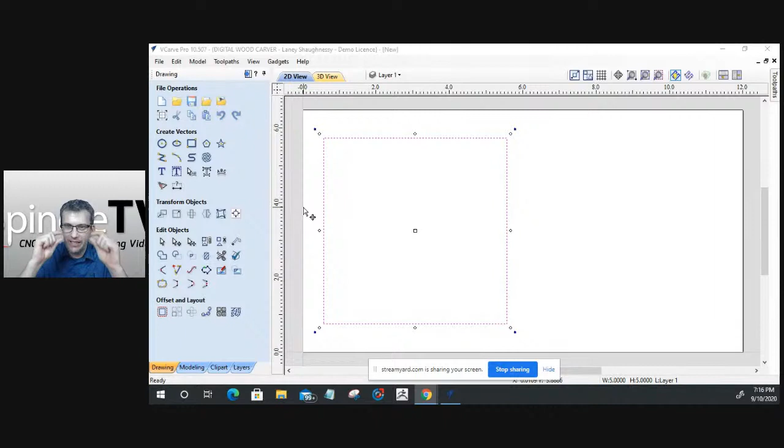What I'm going to do is make just a fun little thin, kind of almost like a pocket tic-tac-toe game for kids, right? We're going to start off with a very simple one, it's got a little lid that holds all the pieces and everything. Very simple little tic-tac-toe project, just kind of messing around. We're going to do some designing while I'm answering your questions, and we'll go from there.

Right now I've got a project set up that's basically a 12-inch by... let's go 7.5, so we'll make it a 1x8 board, 1 by 7.25. Just a simple 1x8 project board there, this is what we'll use. I'm going to be touching off on the surface material, starting in the bottom left corner. So 12 by 7.25 by 3/8 inches thick, it's going to be 3/8 inches thick. And then I'm going to be cutting some of the parts out of a 1/4-inch thick piece of material, probably most likely 1/4-inch plywood or something. But that'll be my job setup.

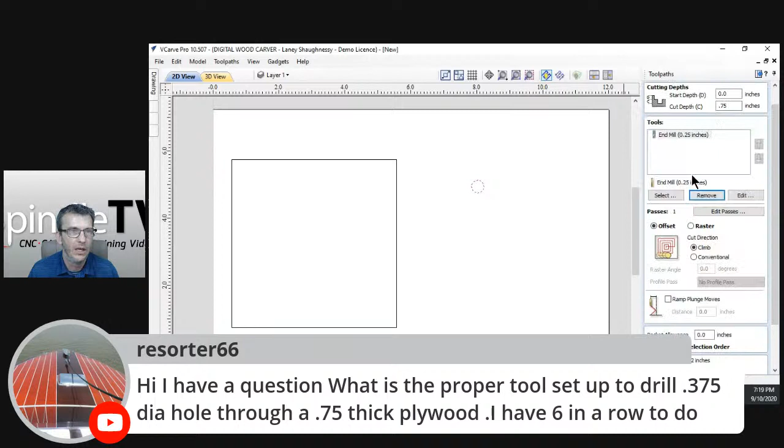Because if I'm using, let's talk for a minute, like a 1/4 inch hole, right? Let's say if this was holed with a 1/4 inch bit. If I'm drilling a 1/4 inch hole with a 1/4 inch drill bit, and I come down too fast on it, there's an opportunity for that bit to flex a little and slightly wallow out the top of the hole. So if I use an undersized bit, like a 1/8 inch end mill to cut my 1/4 inch hole, then it won't wallow out, I'll get a nice, perfect, clean 1/4 inch hole. In our case, we're cutting a 3/8 inch hole with a 1/4 inch bit, and we're going to run it as a pocket toolpath offset. Let's hit edit here.

So a 1/4 inch diameter bit, draw your 3/8 inch holes, and do a pocket cut. That would be the best way to do it. Give you some nice clean holes.

If you need the holes oversized or undersized slightly for whatever reason, then you can put in a pocket allowance. A negative number is going to be a bigger hole. A positive pocket allowance is going to be a smaller hole.

So if you need to slightly sneak in on that fit for your dowel and all, you can go negative 0.002, like 2/1000ths of an inch, and just slightly over big so that it fits in just perfect. If you wanted to, first do it with no allowance and see what your fit is. If you need to make it a little bigger, add a little bit of an allowance to it. All right, cool. Very cool.

All right, so let's back up on Darwin's question about saving and all. Troy throws out that there's also an increment and save option, and that's an option that people don't use very much. Let's go to a full screen here.

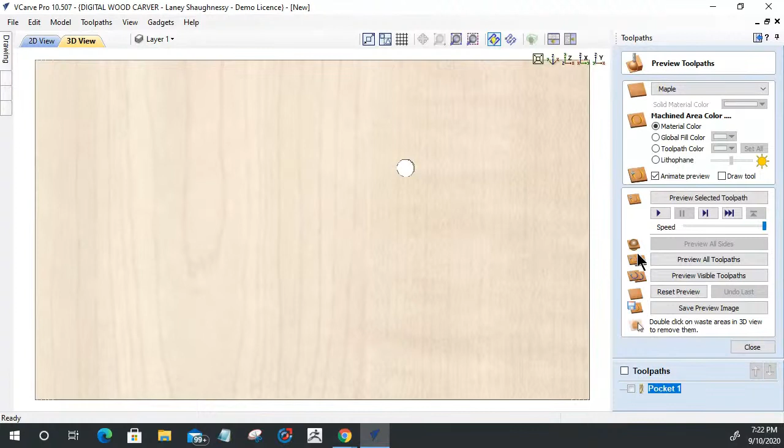And it's something that people don't use very much. But if you have to create revisions that you might need to backtrack on, increment and save is a good option for that. So thanks, Troy, for throwing that out there. Not many people use that much, or really know about it, but that's good that you brought it up.

All right, let's get rid of that pocket, and let's move back over here to my 2D view. Let's get rid of this circle, and we'll move on to the next question. Let's get this centered up. Now, what I'm starting off with here on my 1x8, 12-inch long board, 3/8 inch thick, is a 5-inch by 5-inch square.

5-inch by 5-inch square. And we're going to have both the lid and the gameplay area on the same board - we'll cut them both out of the same board. So what I want to do is mirror this right here.

I'm going to create a mirror copy and flip it about job center, and I'm going to flip it horizontally, so I have 2 of them there. Cool. All right, let's go on to the next question.

How do you keep track of all the Vectric files? Do you group by tool, laser, 4th axis, etc., or some other way? Harvey, that's a great question - how do I save my files and everything?

When I'm training my customers, usually the first thing I have them do is in their documents folder - and this computer probably isn't set up properly, but we're going to see how well I follow my own instructions - in the documents folder, I usually have them create a folder called CNC jobs.

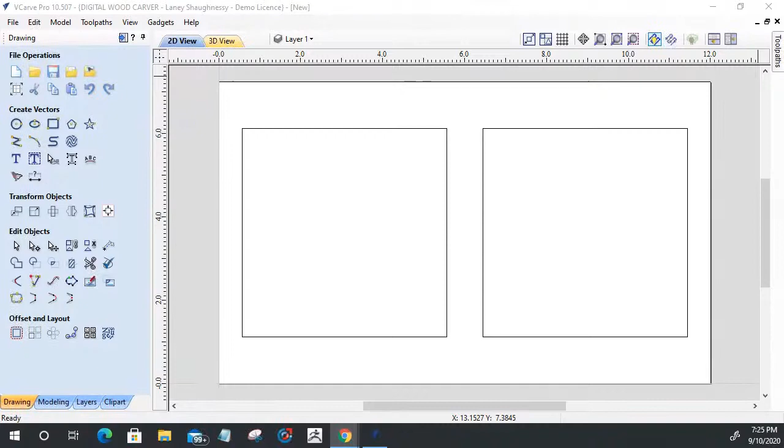So that's how I do it. You can set up whatever system works for you. And if you want a holiday type theme, like Christmas, Thanksgiving, Valentine's Day type projects, you can break those categories down and put those projects inside there, really kind of have those sub levels. That would be good, right? There'd be nothing wrong with that. So that's a good question.

All right, so in here I want to create the gameplay area. What I'd like to do is an offset of this, my outer perimeter here. I want to offset inward about a quarter of an inch, so we'll go 0.25, and I don't want sharp corners on this necessarily. And that's going to create kind of my gameplay area. Well, part of my gameplay area.

Now I'm going to offset another quarter of an inch. Okay, and this is my gameplay area here. This area here that's going to get, that's going to be some wood, a wall of my wood. And this is going to be milled down here so my lid can fit on it.

All right, so as we move along, hey, Crisscross Grass got here on a Thursday early. Hey buddy, what's happening? All right.

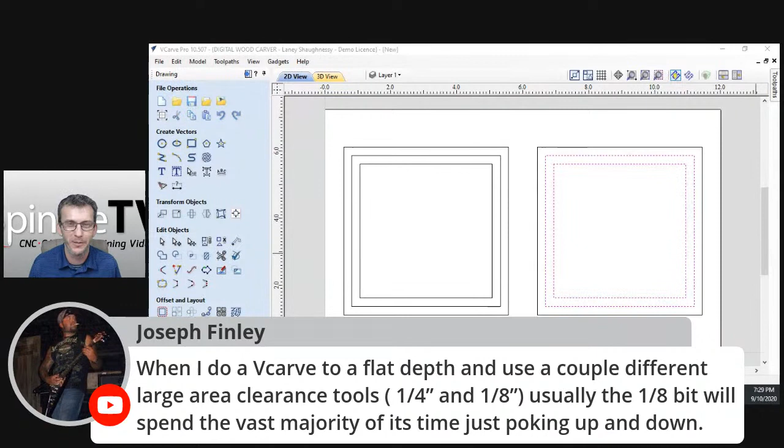So what you've got to look at is, if you're going to use multiple tools, if the 1/8 inch bit really isn't doing anything, then eliminate it and let the V bit just kind of clean those areas up. Do the 1/4 inch do the majority, and then let the 1/8 inch bit clean up in there. But if there are some majority areas where that 1/8 inch bit can fit and it is actually doing something instead of just poking around and cleaning up little bits and pieces, then great, use it. But yeah, that's what's happening. I don't know if that helped answer your question, Joseph, but that's kind of the gist of what's going on.

To follow up on your question - is there a way to fix that? Eliminate it or reduce down to a 1/16 inch end mill, right? Because that 1/8 inch end mill is just too big to get into those smaller areas, so the V-bit's taken over. You could eliminate that and get a 1/16 inch end mill - Toolstoday.com sells them, among other places. That smaller bit would do a lot more work, and the V-bit would have to do less. But if that 1/8 inch really isn't doing anything, eliminate it and go with a smaller diameter bit. That's kind of where we're at there.

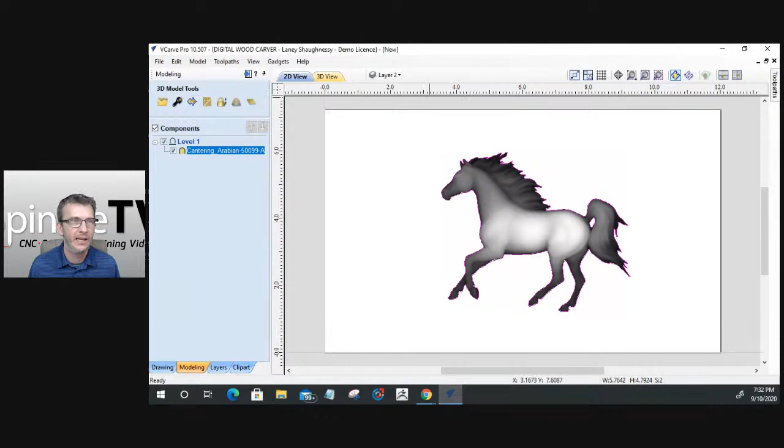Just click that, select your component that you want to put a boundary around, and click that button there, and you're set. Now if you're in Aspire, that button is further down, I think like the second row of tools, but it's still the same looking icon. Let me go with a bigger screen so you can see what that icon looks like a little better - just a little spinning top on its side with a blue perimeter line on it. Right there. Awesome.

Okay, awesome, so let's get rid of that, let's go back to our - delete that out of there. Let's go back to layer 1 where my design is. And now on my design here, what I want to do is divide this up into a tic-tac-toe kind of playing field, right?

Let me basically get these toolpaths created so you can see what's happening here. So the first thing is, on this toolpath here, I'm going to take my boundary over here and do another offset slightly outward by just 1/16 of an inch - not much, a slight 1/16 of an inch. The sole purpose of that boundary is so I can select it with this one here. Let's close this for a minute. The whole purpose of this outer boundary is to select it with this inside one so I can do a pocket cut. My material is 3/8 of an inch thick.

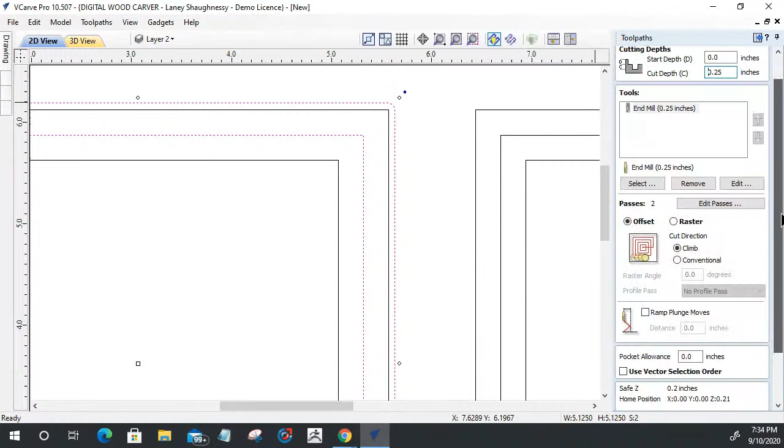Now you guys are going to see some keyboard shortcuts, so pay attention - I'm going to use the letter T, T for thickness. The software knows how thick my material is, it knows it's 3/8, and I'd like to leave 1/8 of an inch of material - I want it to mill down and just leave 1/8 inch. So T minus 0.125 equals 1/4 inch - 3/8 minus 1/8 is 1/4. I'm going to use a 1/4 inch end mill here, offset cut it, and add a ramp - just a 1/2 inch ramp, not too many decimal points. This is going to be my outer pocket, and this is going to be my base part.

Outer pocket. I'm going to go ahead and throw in the bit that I'm using, a 0.25 end mill, and let's calculate that out. Cool, so now we have that pocket there.

For kicks and giggles, I'm going to take this vector and do a profile cut. That's what's going to get cut out, all the way through my material, 3/8 of an inch, with that 1/4 inch end mill on the outside of the line. I'm not going to put tabs on this - no tabs for preview purposes only, but I will put tabs on it before the final save.

I will do a ramp on this. I'm going to do a nice zigzag ramp, just a 1/2 inch ramp is fine. This is going to be my base profile cut, 0.25 end mill. Let's cut that part out just so we can take a look at that base.

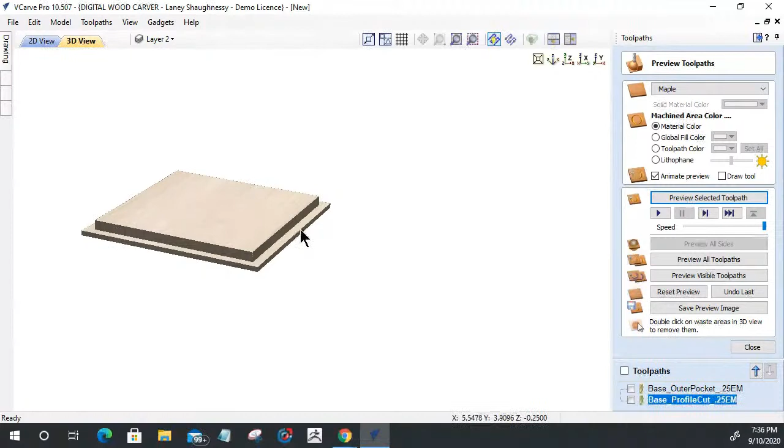So essentially what I have here is this is going to be the base of the gameplay area. This will be the bottom. We've got a little trim rim around it. Okay, cool, so that's where we're at on that too.

Now let's see here, let's keep going. Yeah Chris, I can't believe you made it before 9 as well. Cool, I'm so glad you made it, man. Let's see here, good evening. You guys just keep typing your questions because what I'm going to do is design a little bit, answer some questions, design a little bit, answer some questions, and hopefully I'm answering those questions for you guys to help you out.

Now these two vectors basically are going to represent the meat in the middle, which is going to represent my wall - there's going to be a wall there. And my gameplay area, this inside area here, I've still got to put my dividers in there, they're not done yet, but this is going to get pocketed out.

I think I'm going to use 1/4 inch material for the X's and the O's, right? Of course we know that plywood's nominal dimension is 1/4 inch, but its actual measurement is 7/32, right? Okay, so before you guys jump all over me, let me make sure I got that correct. All right, hold on a second.

Plywood dimensions... yeah, 7/32, I was good, I thought I knew my stuff. Just as a reference for you guys and girls, if you ever wanted to know what the plywood dimensions are, just type in plywood dimensions in Google, and there's a cool little sheet that says actual thickness of plywood. It's a little photo, it'll show you your nominal dimensions versus your actual, which is pretty cool to know. So for 1/4 inch it's 7/32, right?

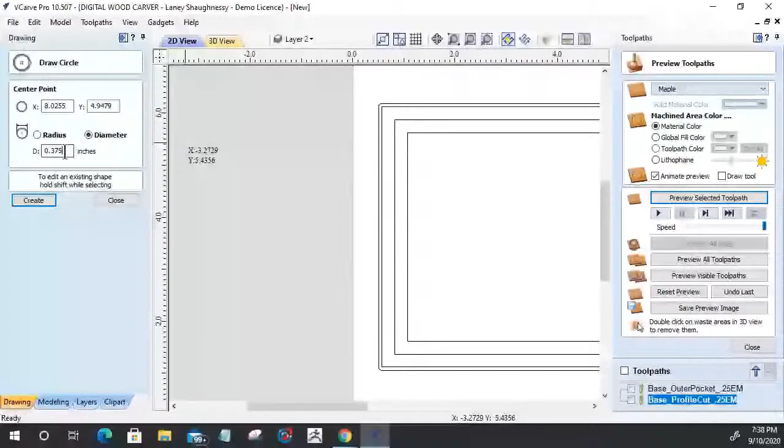All right, so now let's get some X's and O's here. I'm going to use a circle tool here, and I really need to know how big my parts need to be. So let's start off first with a 1 inch diameter. Let's see how big that circle is.

Let's see, just for kicks and giggles, if I array copy that and I do 3 and 3 - 3 rows of 3, 3 columns - and I do a gap in between each one about the thickness of what my wall is going to be. I'd love to have, I don't know how much material I have, but I'd love to have a 1/4 inch thick wall, right, and on the Y a 1/4 inch thick. And if I copy that - oh yeah.

So, you know, let's center these up inside of - I'm going to group them together, the letter G on the keyboard for group, to group those together. I'm going to select this rectangle last, and in my alignment tool, I'm going to align to another selection, which is that last rectangle, and center that up. Yeah, that's pretty darn good right there, because I'll have my wood and everything. I probably could make them a little bit bigger, but this will help me show me where my pieces are going to go. Okay, cool.

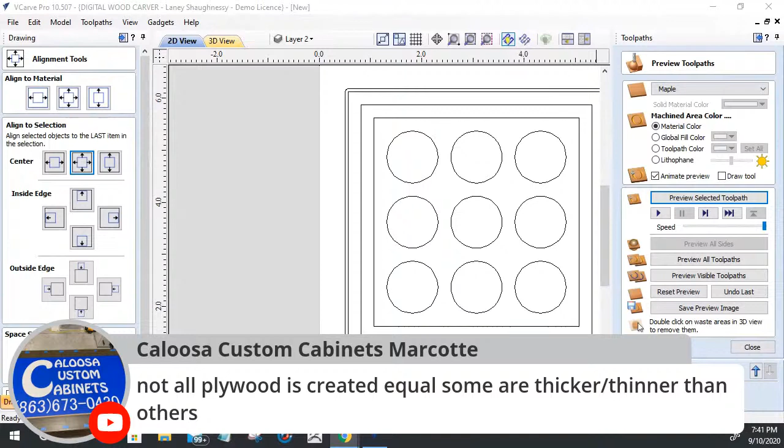I'm going to be picking up my pieces. I'm going to be a cheapskate and cut my game pieces out of simple birch plywood from Lowe's. So we'll trust the 7/32, but of course we would measure our plywood, right? We would put some calipers on it just so we know, because we've got to cut the parts out.

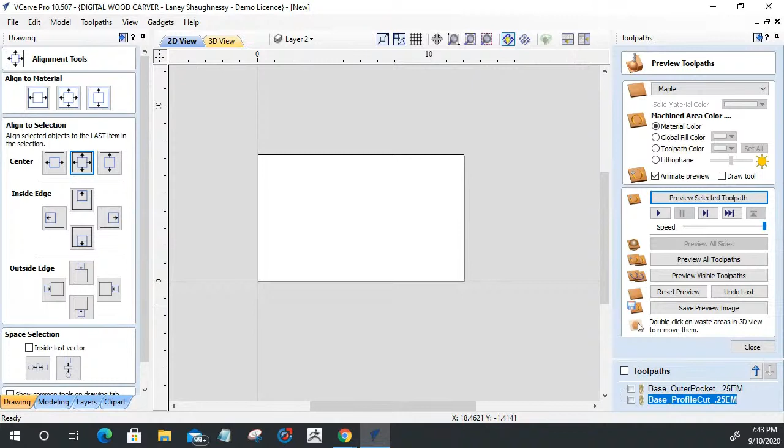Absolutely, I sure can. Let's turn off our layer 1 and throw these guys on - all these are supposed to be on layer 1. I'm going to right click and move to layer 1. The reason they got put on layer 2 is because layer 2 was active - even though it was turned off visually, it was still active when I was drawing it. When I'm drawing this design, I need to make sure layer 1 is on and active, bold right here. But right now we're going to turn it off and make layer 2 active.

All right guys, let me explain this the way I explain it to my customers when I'm teaching them about setting their Z height - using material surface as their Z0 position versus their machine bed. For me, I'm sure there's hundreds of reasons why one would choose the other, but there are two main reasons that I specify.

Let's draw out our table - let's say this is our tabletop. Cool. Let's say on our tabletop we have a wasteboard, a sacrificial wasteboard. Then let's throw a project board on here. Let's draw a router bit and a router. Let's select all of these and line them up center to center so they look more like a router, and group them together so I can manipulate them as one.

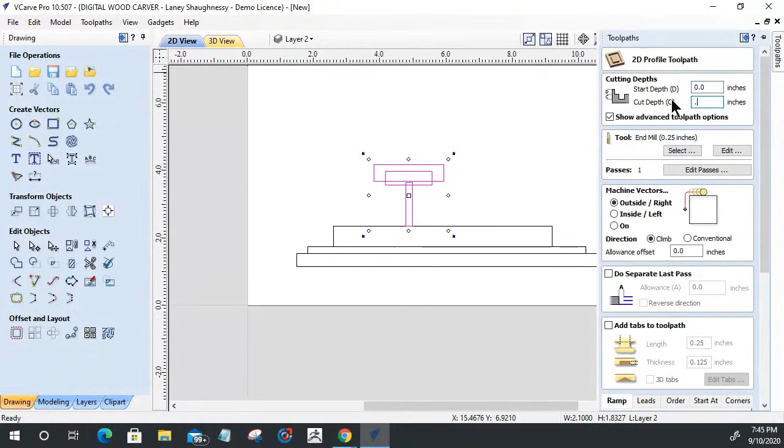All right, so if I am zeroing out on the material surface with my bit, that becomes 0, okay? And when I'm doing something like a profile cut, pocket cut, any toolpath really - let's talk about a profile cut right now. Let's say I do that profile cut and I'm cutting through my material, 3/4 of an inch, 0.75, right? Well, the software is cutting from 0 down to 0.75, okay?

Right, okay. Now what happens if my material is just a little bit thicker than 3/4, or a little bit thinner than 3/4, and I don't know that? I didn't put calipers on it - I just threw it up on the table because I bought a 1x4 from Lowe's and I assume it's 3/4 of an inch. An assumption is the mother of all - you know the rest.

But let's say my board was a little thicker than 3/4, let's say it's 0.8 instead of 0.75. Well, I just told my software to cut to 0.75, so it's going to cut from 0 down to 0.75. And I'm going to end up with a little onion skin where it doesn't cut through, and I'm going to be like, damn, it didn't cut all the way through. So now I got to go in here and try 0.77, do it again, or go 0.80 and do it again.

Well, now I'm guessing, right? I'm guessing how that is. And so now what I'm going to end up doing is overcutting, and I'm going to end up spoiling my spoil board. I'm going to be cutting into my spoil board, putting all kinds of nice grooves in it. And it's the same if my board was thinner than 3/4 of an inch. If I tell it to cut 3/4, I'm cutting through my board and into my waste board. So I'm spoiling my spoil board when I'm cutting into it.

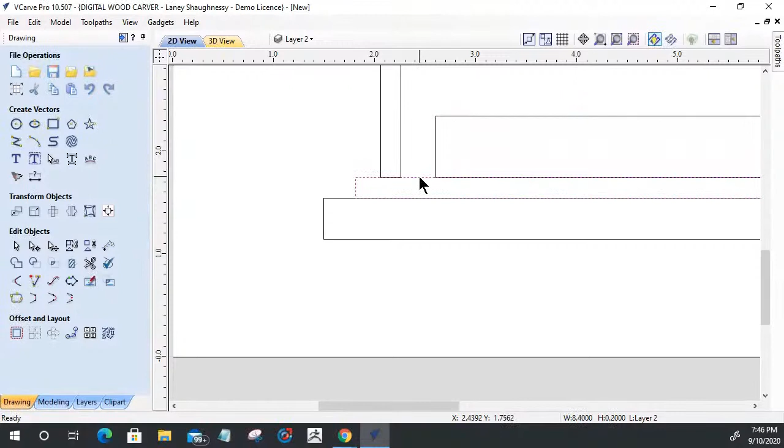So if we decide to set the machine bed, which is whatever your project board is sitting on, in my case it's a waste board, as the Z0, well nothing changes for me in the software. I'm still telling the profile cut to cut from 0 to 0.75. That doesn't change. But in the software, it does all the stuff in reverse. It says, okay, this dude has the machine bed set at 0, so he's telling me to cut 3/4. Well, I'm going to go up here and cut from 3/4 down to 0. So it does it in reverse, cutting from 3/4 to 0.

Now this guarantees 2 things for me. Number 1, if I'm working off the machine bed at 0, it's going to guarantee I'll always cut through my material, because it's going to cut from 3/4 down to 0. Whether my board is a little thicker or thinner, it's still going to cut all the way through because it's cutting down to my waste board. So that's number 1. Number 2, it's going to guarantee that I don't spoil my spoil board. Now I'll get tool marks, right? The bit's going to be kissing across that surface, I'll get tool marks and stuff, but I'm not gouging into it, because it'll always cut down to 0 and never below 0.

Okay, alright, so it guarantees 2 things for me. I'm cutting down to 0, right? Now the other reason, that's reason number 1 for me to work off the machine bed versus the top of the material. If I'm doing a VCarve where I'm not cutting anything out, I'll reference off the top of the material, no big deal. If I'm using my digital wood carver zeroing block, which rests on top of the wood and automatically sets X, Y, and Z when it touches off, it's referencing off the top of the material. But if I'm cutting through my material, then I zero out on my machine bed, because I don't want to spoil my spoil board, and I want to guarantee I cut all the way through my material without leaving a little onion skin. So that's reason number 1 for me.

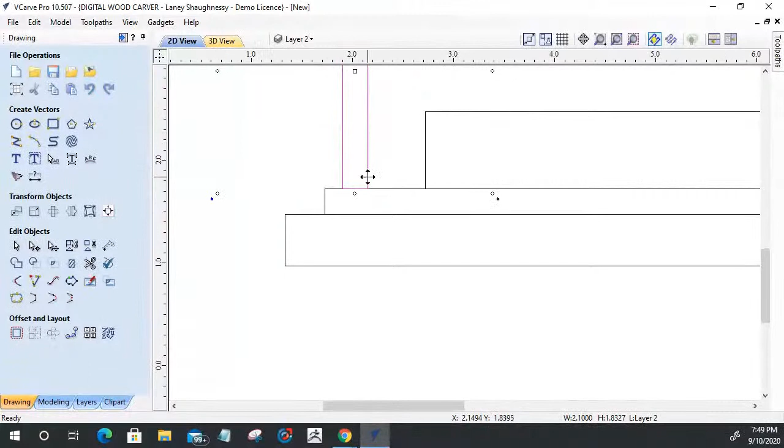Number 2 reason why you would set the machine bed as your 0 position versus the top is if you were doing a 3D model cut where the entire surface of your material gets milled away during the rough cut, or even during the finish cut where that entire surface is getting milled away. Well, now I have no more surface to touch off on for my ball nose bit, my finish cutting bit, and things like that, because it's all been milled away. Unless I make my board a little bit bigger, where my clamps are going to go, and I can touch off on that. But if I've got my board double-side taped to my waste board because I'm going to mill this whole surface—there's going to be a cool eagle on it or something—that whole surface is getting milled away.

Now I have nothing to touch off on for my second toolpath, my third toolpath, whatever. So I would reference my Z0 position off the machine bed. I have a known, flat surface to snap to and work off of. That's the number 2 reason why I would work off the machine bed versus the top. If there's a way that top surface is getting completely milled away, leaving you with nothing to reference other bits off of, then you work off the machine bed as your Z0.

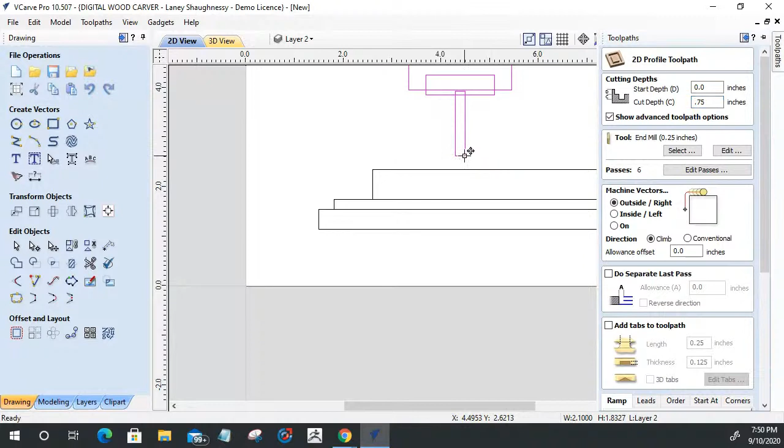If I'm doing a pocket cut, let's pretend that's a profile there, but it says pocket. I'm doing a pocket cut from 0 to 3/8. Then it's cutting from the thickness of my material, 3/4, down to 3/8. It's cutting 3/8 of an inch deep. So it does all the math and everything backwards for you. You don't have to think that hard about it.

Hopefully, Jeff, that was a long explanation, and hopefully that helped clarify some things. But the 2 main reasons I use the machine bed versus the material surface are: number 1, if I'm cutting through my material, because I want to guarantee I cut all the way through without spoiling my wasteboard, since my wasteboard is a jig. And number 2, if my 3D model cut is going to be milling that entire surface away. It doesn't have to be a 3D model either - any of my cuts, if I'm doing a pocket cut or whatever and my whole surface is getting milled away, then I have nothing to reference off of for the VCarve cut, for this, for that. So I want a known flat surface, so I use the machine bed, which would be your wasteboard in this case.

Hopefully that answered that question for you, Chris. Or not Chris, Jeff - that was Jeff's question. I don't know why I got Chris on the brain tonight.

All right, let's go back to our design and make sure layer 1 is active that we're drawing in, and let's continue on, and then we'll answer some more questions.

Well, wait, hold on, let's see here. Let me see, there's a conversation going on here. Let me make sure none of these are questions. All right, they're talking plywood. Let's see here. Ronnie, let's see here. Make sure I didn't miss any questions up there past Jeff's question.

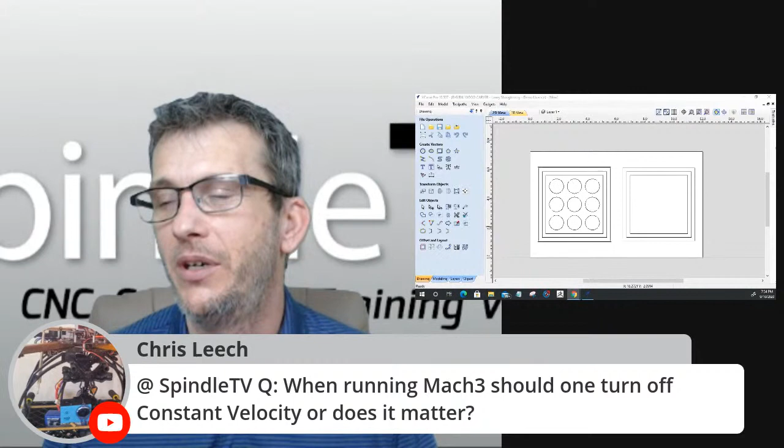But if anybody knows the answer to Chris's question - when running Mach 3, should one turn off constant velocity or does it matter - please put it in the chats to help answer his question if you know it. Okay, cool. All right.

And Chris says he just ordered a corded controller for the joystick thing. Yeah, I'm looking forward to this. I have one - this is the one that runs my machine, and it's fun. I have my X and Y linear movements side to side here, my diagonal movements are the other joystick. My Z up and down and my jog speeds are the left, right, up and down buttons here. And then I can start, stop, pause, emergency stop a program.

On the front buttons here, I can zero out my X, Y, Z axis, and bring my machine back to home. All the buttons have their own functions to run the machine, and I'm going to be showing people how to set that up in a video this weekend. But yeah, it's pretty cool, I just like it, it's fun, it's something different. The joystick thing, that's what I like. It's sensitive though, man, those joysticks are sensitive.

All right, let's answer Chris's question. Let me get my wallet out of my pocket here so I can sit comfortably and gear up. Let me see here.

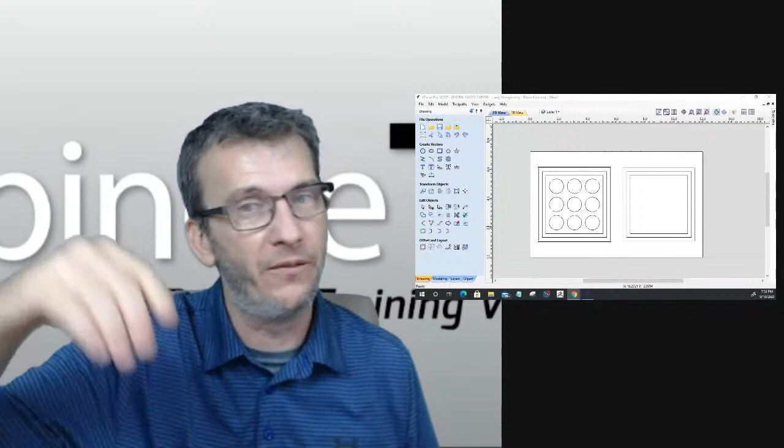When performing a finished toolpath, is there a way to force Vectric to start on top and work down to a final depth versus what Vectric usually does? A lot of people may not know that on a 3D finish toolpath, it goes to the full depth and rides that depth, only raising up or down based on the contours of the model. The rough cut toolpath does multiple passes, but the finish cut goes straight down because it's assuming there's only a few thousandths of an inch of material left, so it rides at full depth, only raising up and down based on the model's contours.

Chris asks, is there a way to force Vectric to start at the top and work its way down on a finish toolpath? In my six years, I've never found a way - no. I'm going to definitively say no. I'm sure there may be some workarounds I'm not aware of, but as far as programming or setting something, no. It's designed to ride at the end, so I don't know of any way to change that. Sorry, I wanted a good answer, but that's the only one there is. There's a lot of people out here running Vectric, and if you know a way I've never found - I'm pretty in depth in this stuff - share it, I'm always up for learning too. But we're talking about a 3D finish pass that's designed to ride at the bottom of the cut, only moving up and down based on the model itself. The question is whether there's a way to force it to start at the top and work its way down, and unfortunately, no.

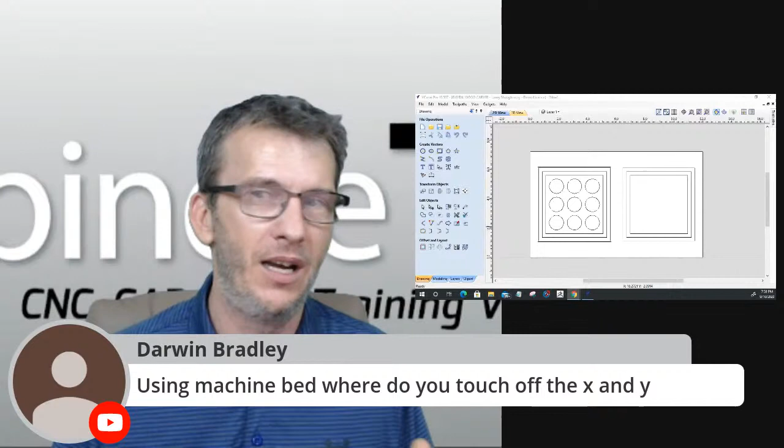Darwin pops back in and asks, when you're using the machine bed, where do you touch off the X and Y? We always set the X and Y first. So let's say I'm working in the center of my board, and I'm using the center of my material for my datum position. I'm going to raise up and zero out X and Y first, get my bit over that center point, come into my software and controller software and zero X and Y.

Then I'm going to move my router over to my wasteboard, come down and touch off my Z. Now some people have touch plates, some people have touch buttons that are automatically set up. I'm talking about when you're manually setting your Z on the wasteboard with your touch plate or touch sensor. Zero out the X and Y first, then come over and touch off the Z. Now, for users using the digital wood carver quickset block, which sits on top of the wood here.

It is designed to touch off X, touch off Y, then raise up and touch off the Z automatically, and it sets the Z. After that touch off is done, you bring your touch block, set it up on top of the wasteboard, our machine bed. Move the router over and bring it down, touch off on it, and type in 0.5 to reset your Z. Hit enter to lock it in, and that'll reset the wasteboard as your Z0.

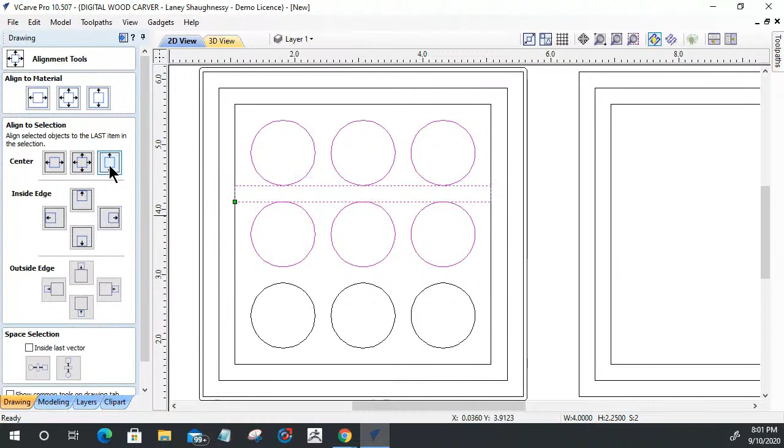I need a 1/4 inch, 0.25. I'm going to ungroup these. I'm going to select just these 2 rows right now, and group them together so the software treats it like one object. I'm going to select this rectangle first and then this group last because I want to center up and down to this group. I'll use my alignment tool and align to center, so that'll center it there.

All right, I'm going to select this group again, ungroup it. The letter U on the keyboard is your ungroup shortcut. I'm going to group this with the letter G to group this together.

I'm going to select on this, and come in and hold down my control and alternate key to move this down. The alternate key keeps my part centered. No matter where I move my mouse, whether horizontally or vertically, I can move on those alignments, but I can't move freely off axis, like down in that corner where the arrow is. That alternate key is keeping it restricted to those 2 axes, so I just want to move straight down with control and alternate.

That makes it copy. It looks like I snapped right to where I need to be, but I don't think I did. So I'm going to select my group last, and align up and down. It was so close, it didn't move. There we go.

Now I'm going to use my keyboard shortcuts. I want to make a copy, so up here, copy and paste—no, that's undo and redo. Sorry, copy and paste is Control C and Control V. So I'm going to go Control C, Control V to make a copy.

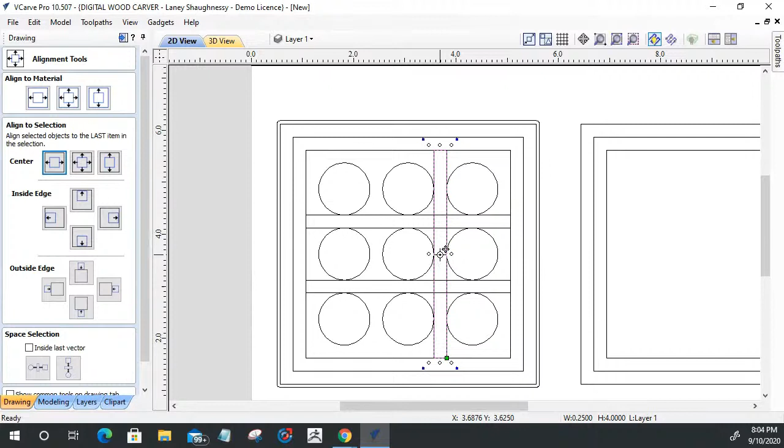All right, Control C, Control V, copy paste. I'm going to hold down my alternate key and drag that across. Snap it right there.

It's not in the right place, but that's okay. I'm going to take my group here, letter U to ungroup, come over here and select this group. Oops, not that part. G to group, select that rectangle, select that group last, and align left to right, so it gets centered up in there.

All right, cool, so now I've got a grid. Now these parts here, I'm going to ungroup, and start trimming and welding these parts together to create my grid. And then, of course, my O's and everything are going to be in these center points. Now someone says, hey Laney, could I just have drawn a square the size I want and then done an offset array of 3 and 3 to create those squares?

Absolutely, you could have, right? But I wanted to do it this way just so you could see. All right, so now that we're there, we'll start trimming in a second, but let's answer another question.

Laney, when zeroing out the Z-axis on the touch plate, is there an icon that will automatically lower and raise the router? Yes, there is.

So let's minimize Vectric for just a moment, and let's go into, you guys are going to see a bunch of icons pop up here. View desktop icons, holy moly, give it a second, there's a million of them, they're going to pop up.

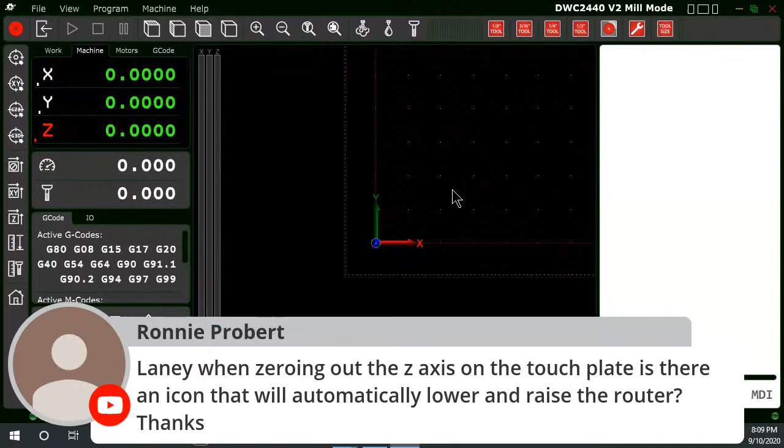So that's the button right there for the automatic touch off. Now, if you have the DWC quick set zeroing block, these are your touch tools here, up here, and they're integrated into the TNG. All right, let's close out of that and go back to our Vectric. So hopefully, Ronnie, that answered your question.

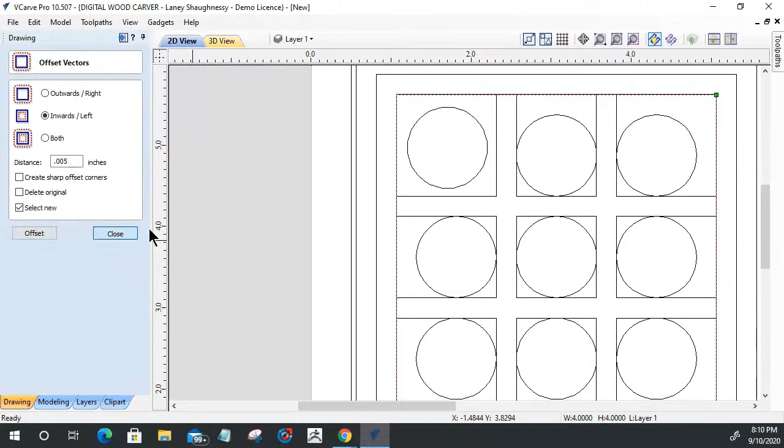And let me get rid of that one. All right, let me use my trim tool and let's trim. I'm just trimming around the perimeter.

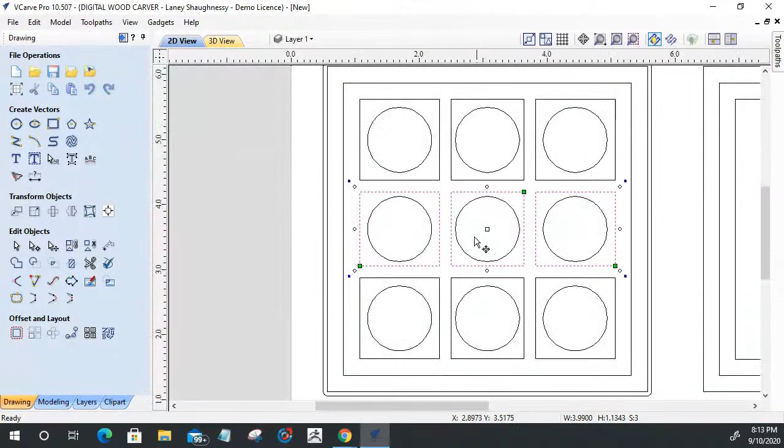All right, cool. And then on this centerpiece, my centerpiece right here, the crown jewel of everything. This box is a little small, so let's go ahead and keep things consistent. Let's grab this, this, and this. Double click on it, and I'm going to hold my shift key, and I'm just going to pull that out slightly. All right, wonderful.

Okay, can't even hardly tell the difference, can you? Now if I wanted to check my size, like let's say somebody's worried that's going to drive them nuts if they're not the right size - these boxes are 1.245 inches, right? I could come in here and say 1.245, unlink this, and make this 1.245 and hit enter. I could make sure everything is the right size. So my middle one here is going to be off. Let's link that back together. Well, no, it's not - link it back together. 1.245. The reason why I'm doing this is somebody's going to say, man, straighten that up, Lane, that's terrible. All right, we'll get everything the same size and consistent. 1.245. Calculate. And so now all my squares are the same size except for this one.

Cool beans. This one's not. All right, there's my gameplay pieces. Okay.

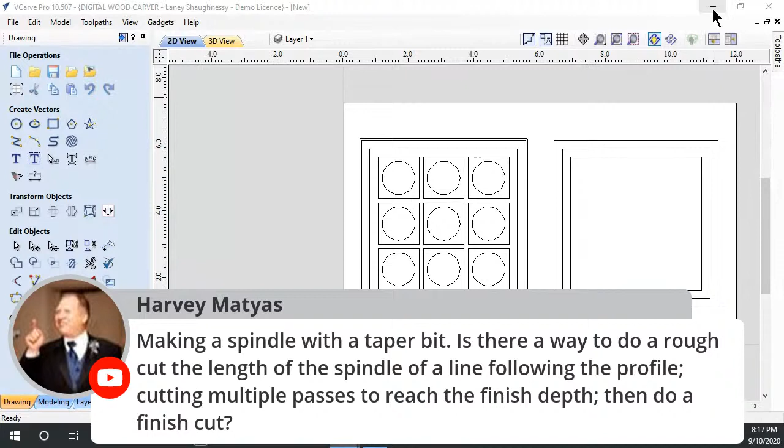Yeah, Harvey, that would be essentially a pocket cut, if you will. Let me see here, let's minimize this for a second, and let's right click.

All right, let's do a 15-inch by 2-inch diameter. Let's get Harvey's question out of the way. Bear with me, Harvey, while I draw out a taper. All right, N for node editing. Let's pull this down about halfway to create that taper. Let's right click and delete that span to create the profile. Let's take our drawing tools and draw a line from here to here.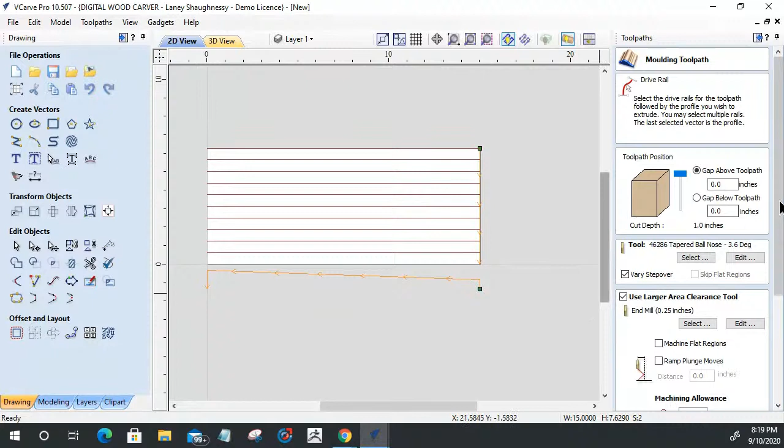And let's calculate that. Now the reason why I'm doing this this way, Harvey, is because I'm in VCarve Pro, not Aspire, to create that toolpath and everything. So I could just kind of show this taper for a minute.

Okay, so imagine if we were making a tapered cylinder or whatever, and let's get this along the X here, this tapered cylinder. Now if I wanted to, I could create this taper using... I don't think the fluting toolpath will let me do that.

Ramp overall length. I might be able to do a fluting toolpath on something like that. But if I was doing this taper here, and I wanted to do it as a pocket cut, to create a smooth pocket cut, that's a tough one, my man. That's a tough one.

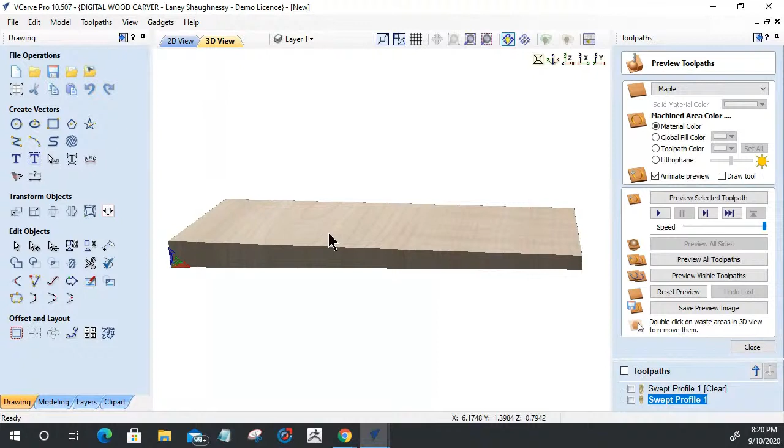I could divide this project up into sections that get pocketed out to a certain depth, then move over to the next section where we pocket out to a certain depth, kind of creating that stair step cut to get down pretty close to hogging away the rough material, if you will. And then the finish cut is what's going to get you.

Doing a finish cut, see, the swept profile allows me, it's kind of a 2-in-1. It allows me to do a rough cut. Okay, machine my flat regions and do a rough cut with a larger end mill, and then just do the finish cut with the ball nose. That's my molding toolpath. And so if we were to calculate this so you could see the difference between the two.

Let's turn off the finish cut for a minute. My molding toolpath rough cut is just removing this last little bit here, right? It's removing that part that's getting ramped down or tapered. So it's going to pocket out and kind of start breaking that down into those stair steps that I was talking about.

And then the finish cut is going to come in and do the finish cut on that taper. And I don't know if that answered your question, because the molding toolpath kind of does it all. I was thinking of a way of doing a pocket cut across the whole thing to kind of get it leveled out, then pocket cut a certain section, then another section, just exactly like this rough cut did.

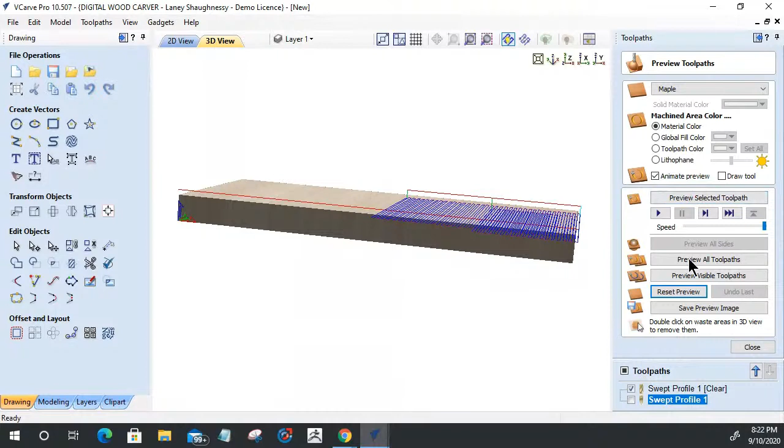Where only certain sections are getting milled down. I'd be pocketing out this, this, and this. But honestly, man, I don't know. The molding toolpath kind of does it all for me. It sets up those 3 pockets to get those milled down, and then my finish cut just kind of comes in and does that finish work when I'm doing a spindle.

In VCarve Pro. When you're modeling a spindle in Aspire and creating a 3D model, you have a rough cut and a finish cut. The rough cut is basically that pocket toolpath, hogging away the waste material, and the finish cut cleans up, just the same way the swept profile acts. Think of the clearing as the rough cut, and this as the finish. So I don't have a really great answer.

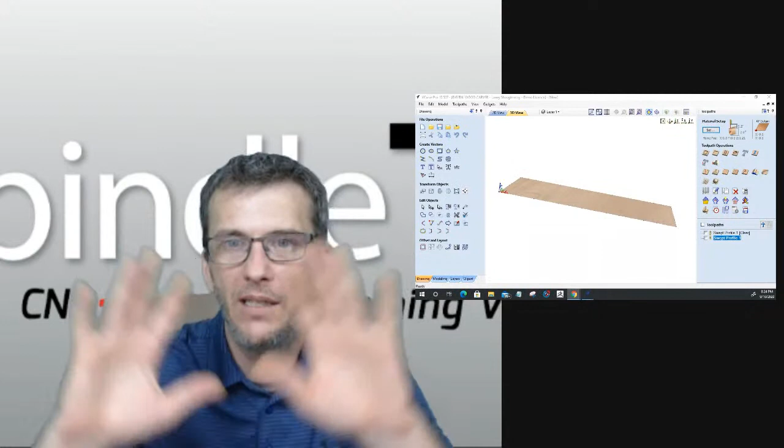All right, let me see what you guys are talking about here. I got to pause for the cause. Baron, what just went out? You guys seeing me? Let me see. My phone's been going off like crazy. Let me see if... You guys, can y'all hear me?

Crystal, if Michael's watching, my mama said I got to apologize for saying S and giggles, because Michael's watching. Keep forgetting Michael's watching. Michael, I hope you're watching. You got to watch my language. My mama texted me and said, you got that 5-year-old watching. Stop saying S and giggles.

Anyway, all right, so let me see here. You guys were good, we got audio and all that stuff. We can kind of continue on and all that wonderful jazz. Cool, all right, let's get back to it. My mama texted me, she's watching. That's funny, 46 years old, my mama's still getting on to me. All right, let's see here.

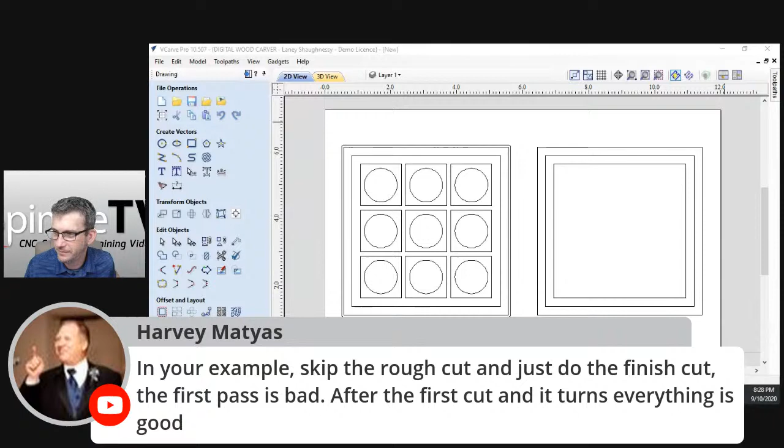Okay, Calusa says, maybe he's asking about an offset, because in our 3D cut and everything we do have that machining allowance that brings that rough cut down to a certain amount, and then the finish cut cleans up that last little bit. That could be it.

Oh man, why I don't... it's not registering. I don't. Maybe it needs to be. Okay, hold on, he's saying hold on. Let me come back here.

VCarve Pro. I accidentally missed the rough cut, and it turned out, but the first pass was bad. Okay, so you missed the rough cut. All right, okay.

So the rough cut would be the answer to cleaning that up, so that the first pass is not bad, and then the finish cut would be the finish up, right? Is that what you're saying, Harvey? Hey, I missed the rough cut. That's all right. So I think he's kind of clearing that up and closing that out, so we can move on.

Cool, sorry, and Harvey, if I didn't get it all together, if you're like dude, that just went over Laney's head, it probably did, but hopefully you see where we're at. Okay, let's go ahead and get rid of our circles here.

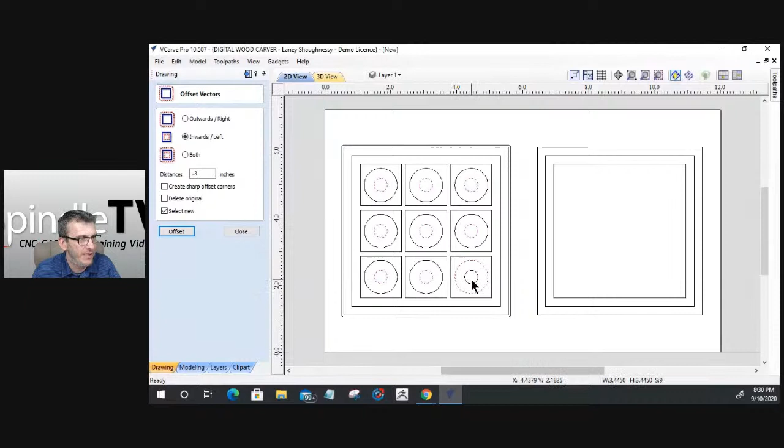Yeah, let's go point... there we go. All right, let's go ahead and select all of these bad boys. Well, what am I doing, I'm an idiot. Let's just select all those and deselect that.

Deselect that. All right, I'm going to group those together for right now. I'm going to use those later on in a 1/4 inch piece of material to cut the O's out. I need to make some X's real quick. Got to make some X's. And I want my X's to fit in my part. So let's see here, what would be a good size X?

Let's rotate that, I'm going to hit the number 9 key one time. Cool beans, I'm going to hold down my shift key and drag that out for a minute. I'm going to center myself up on my material, or no, to this. Center, there we go.

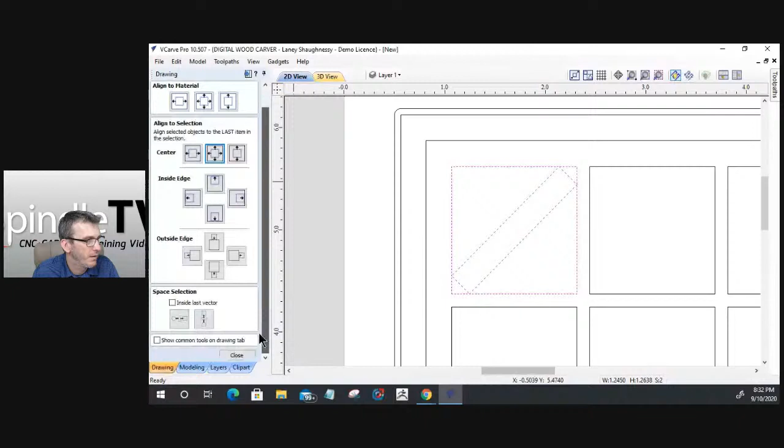Cool beans, I'm going to select this, I'm going to Control C, copy, Control V, paste. I'm going to rotate that twice by hitting the number 9 key twice. All right, cool beans, I'm going to weld these two parts together. Select both of those and hit the weld button to weld that together to make that X.

Nice, I'm going to slightly offset it, I don't want it to be like a tight press fit in there. I'm going to slightly offset this X inward, 10 thousandths of an inch, delete the original and create the new. Okay, so it just kind of fits, right?

And then I'd like to just put some radiuses on these corners here, so I'm going to use a fillet tool. Let's see what a 1/4 inch... that's quite big. Let's go with a 1/16 of an inch, let's see what that fillet looks like. Oh yeah, looking good, just going to go around on all 4 of these corners here.

And there we go. Let's do a little bit of radius in there and there. That was already radius. That's good. All right, so we got our X.

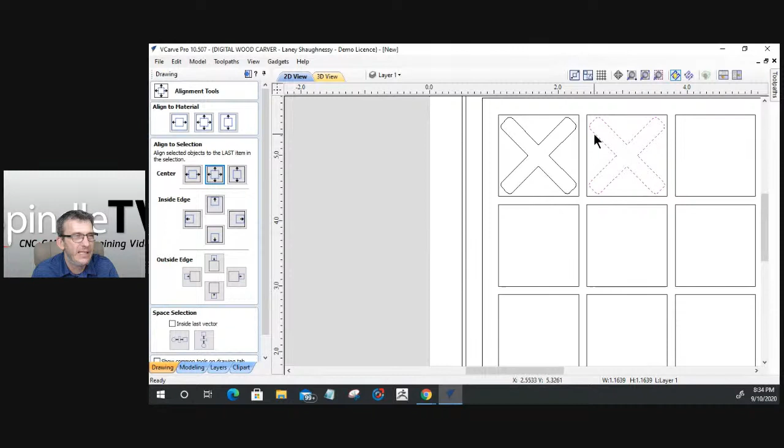And, you know, if I basically wanted to look at my height here, or my width, should I say? Let's look at my size tool for a minute. My width is 1.1639, from the left side to the right side here. You with me?

All right, cool. And if I wanted to offset this, I would need to know how much to offset, right? If I'm gonna use my array tool - we don't talk about the array that much - I need to do an offset. An offset will measure from the left side to the left side of the next part.

So I need to offset this a certain distance. Well, my distance here, for the piece itself, is 1.1639. We'll put it over here as well, 1.1639. But there's a distance that it needs to travel to fall center of this, right? So I'm going to cheat for a minute here, and I'm going to measure horizontally from this point to this point, and it's 0.208. That's kind of my number there.

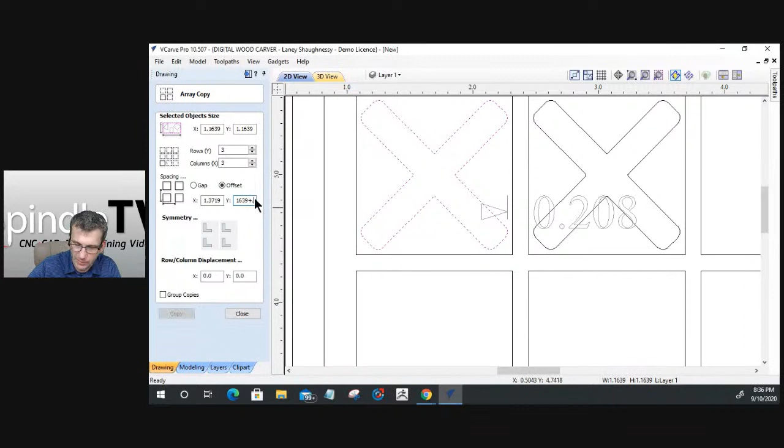And so in my array tool, if I came in here and added plus 0.208 equals plus 0.208 equals, right? This would be a negative number because I'm going down, not up. So the Y would be a negative number. I should be able to copy that and fill all these holes. And of course, this one's a duplicate - let's delete that. But I should be able to copy that and fill all those in. You guys agree? Of course you agree, you just saw it happen.

All right, let's go big screen. So basically an offset is measuring from the left of the part to the left of the next part, right? That's an offset. So all I did was measure how wide my part was. I drew another part here, kind of got it centered in the square, and then I measured that distance from here to here. And I added that to that offset so it all falls in center.

Cool. All right, let's go ahead and select all these parts, except for those. And again, I'm going to group those together, and let's move those over there. That'll be my X's and O's. X's and O's, all that wonderful jazz. All right, okay, let's create some toolpaths.

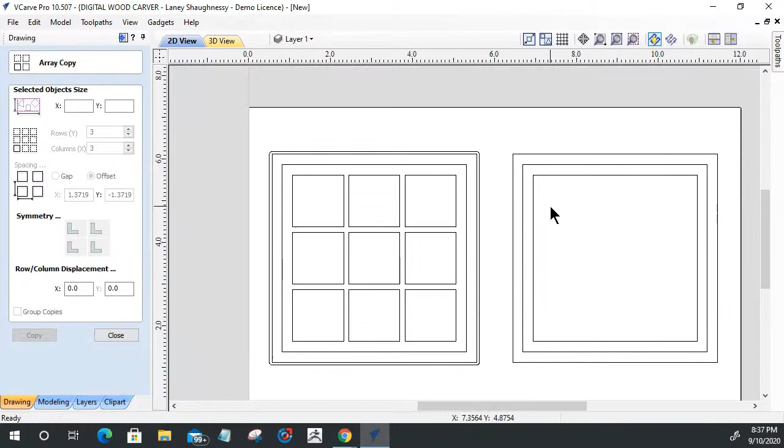All right, now if I take these two parts right here and group them together just for a minute - not delete, that was the delete key, the G key is group - I'm going to group this together for a minute. Group. Now, this part, if you remember here, where'd it go?

Let's preview that visible part. If you remember here, I had that lip right there, right? Well, the lid's going to fit over that and press down to that lip so I have my full part. And this height here, if you remember, is 1/4 of an inch.

So I want to pocket - let's ungroup this. I want to pocket from here, okay? I want to pocket this area 1/4 of an inch down, the lid, okay? All right, you guys with me? I don't need this internal rectangle here, just this. I want to pocket this lid.

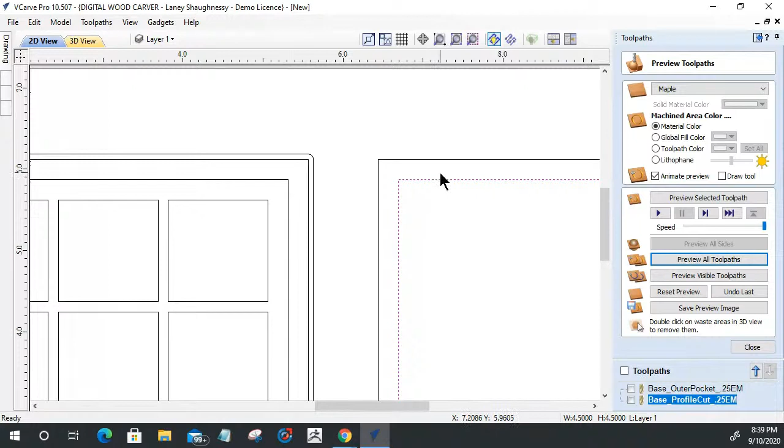And now when this gets cut, this gets pocketed, this is going to get radiused here, right? This is going to get radiused here. I need to go back and radius these and recreate that first pocket cut after I radius this. So I'll go back and do that. I know that, and I just didn't do it.

But let's pocket this out. And we're going to go more than 1/4 of an inch. We're going to go slightly bigger, not very much. We're going to go about 0.27.

Because I want this lid to be able to fit and close tightly on this here. Now, this pocket cut is going to be a tight fit if I don't create any kind of allowance for this part to fit into. So I want to do an allowance.

I want this pocket to be overcut slightly, not much, and it's going to be a negative number. I'm going to go just 0.002, so it's a nice friction fit. If that's too tight for you still and you can't even pry these two parts apart, go bigger. But I like to sneak up on it.

So this is going to be my lid pocket. Cool, 0.25 end mill, and let's calculate that out. Reset that preview, select the toolpath.

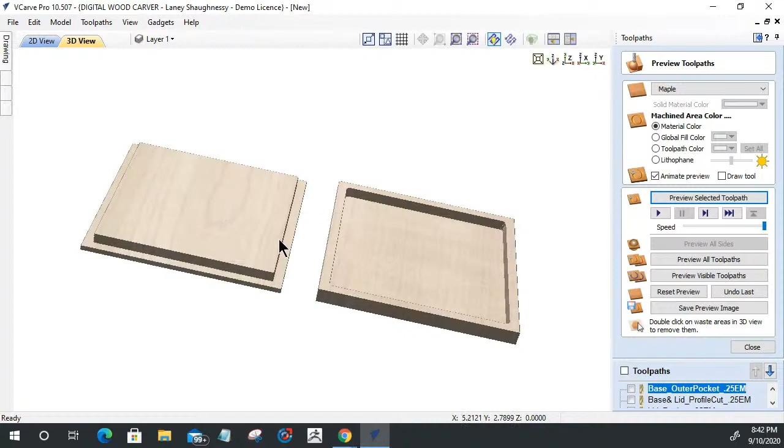And of course, let's do this base outer pocket here. Right, so that lid fits over that, right? So far, you guys get it? The top and the bottom?

Cool. All right, now on my pocket cut here, I need to radius these inside corners so that my lid's inside radius fits, because you can't fit a square corner in a circle, right? Or what is it, can't fit a round peg in a square hole, or a square peg in a round hole. You could, but it'd be trouble. So I need to create a little bit of a radius here.

I'm going to use my fillet tool, ladies and gentlemen. Then we're going to answer some more questions. I'm using a 1/4 inch bit to cut this stuff, so my radius is 1/8 of an inch. And we're going to come in here and fillet these 4 corners.

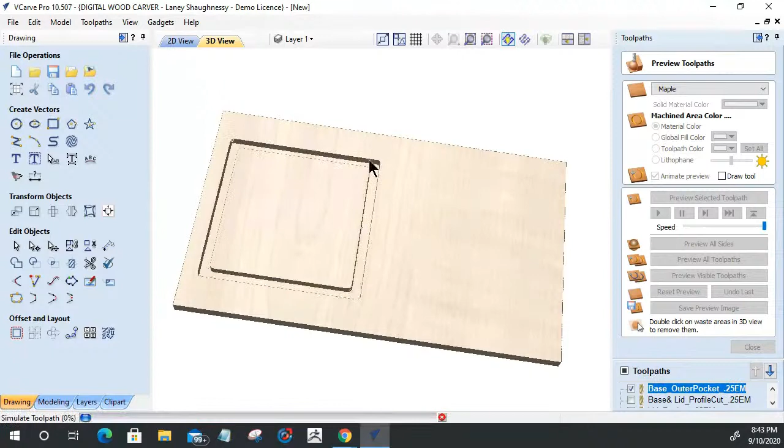Wonderful. And we're going to go back into this pocket toolpath and redo it right there and there, and click calculate. Okay, cool. So now, you know, when we do that pocket, it'll round those corners off so my lid can fit around it, right? Exactly.

Let's see what we got here. Any more questions? You guys go on in and ask the questions and stuff. All right, so let's get our gameplay area here.

Now, of course, on all of these, when that router bit is pocketing these areas out, they're going to be rounded, right? So you could just leave it be and let the router bit do it, since it's going to radius off anyway where it's turning that corner. I kind of like to, if I know that's going to happen, just go ahead and get it done, right?

So I can come in here and just click on that with that fillet tool and get all those parts already rounded off. Right. And all I'm doing is just getting on the corner, that check mark pops up, putting in that 1/8 of an inch radius, all that good stuff, right?

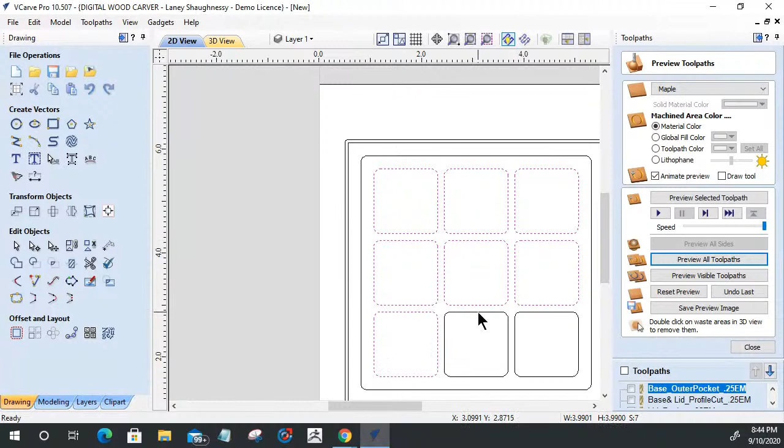Right, okay. So now I want to go ahead and pocket these guys, and I'm going to pocket this down 1/4 of an inch. So I could actually tie it in with this, so it's going to be 1/4 of an inch, and I can tie it in with that. And we're going to rename this - this is going to be base pockets. And calculate. Cool beans.

All right, so now we got a cool little pocket tic-tac-toe game that has a lid. It closes up. On the other side of the lid, if I wanted this to be a 2-sided project and I wanted to customize this, I could, lightly, because I only have an 1/8 of an inch material. If I had a laser, I could laser engrave a design on the lid.

I could lightly etch something, a V-bit with a flat depth of just a few thousandths of an inch. I could engrave someone's name or whatever. I could do it as a 2-sided job where there's some kind of little decorative design there. But when these two parts go together, all the X's and O's will fit in here.

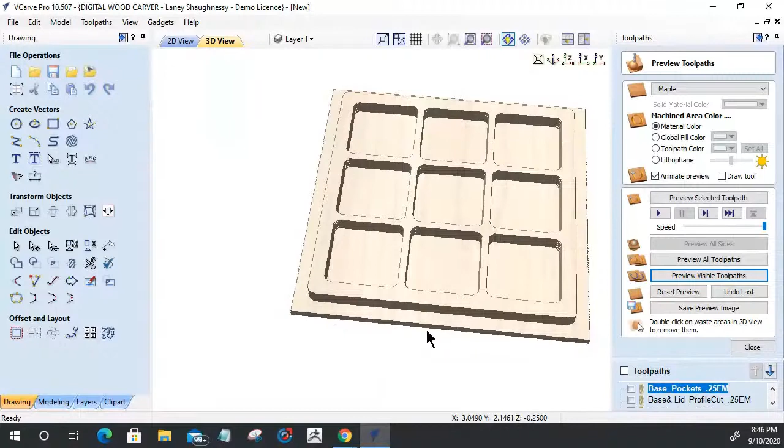Now you're going to say, wait a minute, Laney, the X's and O's aren't going to fit in there because look at all those X's and O's you've got. All those aren't going to fit. Well, there's only so many X's and so many O's that you're going to use. You won't use all 9 of those.

But if I do cut these out of 1/4 inch thick material, get what I'm thinking? If I cut these out of 1/4 inch material and I go to stack them in here to put the lid on, guess what's not going to happen? Lid's not going to close, right? It's coming all the way down to that.

I left 1/4 of an inch here, and this is only 0.27 inches deep over here. So I only left myself just a little bit of air room—air, A-I-R, a little air space. There we go, when that lid closes tight on here.

So what's my alternative? My alternative is that my outer perimeter here, I could shallow it up some to where it's just a little lip that this hooks on, which of course raises this pocket up. But then again, I'm only cutting 1/4 of an inch. So if I go 1/8, I'm only adding 1/8 of an inch to this, and it still doesn't fit those two parts in there. So my dilemma is, if I want this to be a little pocket pal game with my X's and O's, 1/4 inch material is not going to cut it.

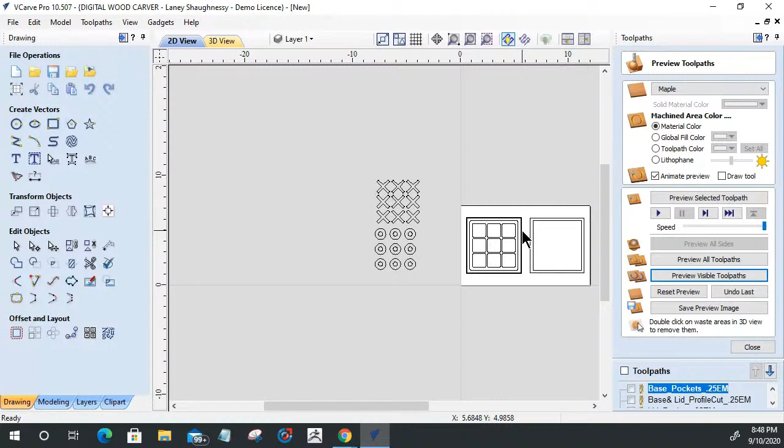I need to be 1/8 inch material for my little game pieces, or I make this whole thing out of thicker material and make my pockets deeper. But I want this to be small, very thin, almost basically thinner than my wallet—just a little pocket carry around game. So I'll go ahead and cut the X's and O's out of 1/8 inch material.

So let's go ahead, I'm going to right click and open up another VCarve Pro. And then we're going to answer Ronnie's question. Ronnie's got a good question. Hold on a minute, let's create a new file.

Let's go with a single-sided board. It doesn't need to be that big. Let's go 8 inches by 6.5—let's go 6 inches by 1/4, by 1/8 of an inch thick plywood, which is not the correct dimension, but we're going to leave it there because we're going to use some good stuff, right?

Good stuff. I'm going to work from the bottom left corner, material surface. Let's calculate that—or not calculate, but click OK. Over here, I'm going to copy these vectors, and over here, I'm going to paste them. And then I'm going to take all of these guys right here, and all of my O's are grouped together.

I want to ungroup them, and I want to group them together individually. So G, select these two. G, individually group those together. I don't want them all grouped as one group, I want them individually grouped. And then my X's, I just want to ungroup. And I want to select all these and nest them. I'm going to nest them.

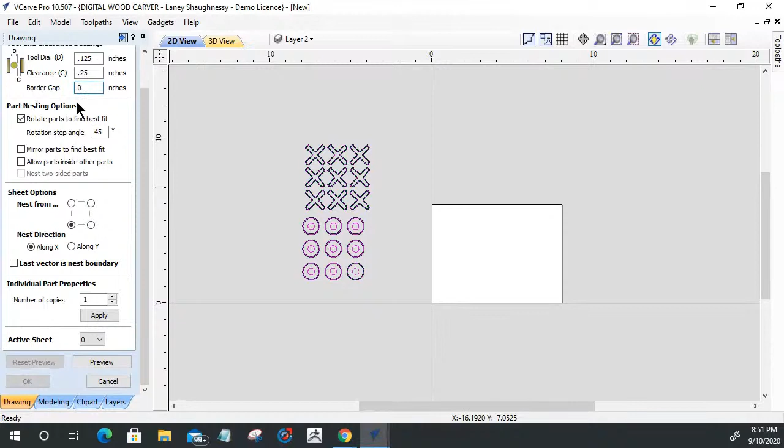All right, what's my board size? I'm going to go 6.5.

All right, let's nest. Oops, that one is not grouped. That needs to be grouped. All right, let's nest those.

There we go. All right, let's create a profile cut. We can close our nesting tool, I'm done with that. And we're going to create a profile cut, going to cut 1/8 of an inch deep. I'm going to use an 1/8 inch end mill.

Outside of the line, the software is smart enough to know that I have holes in the middle of my circle, so it'll cut on the inside of the line for those holes. I'm going to use a little piece of double-sided tape to hold this down. I don't want any tabs on these because I do not want to be sanding and playing with them for tabs.

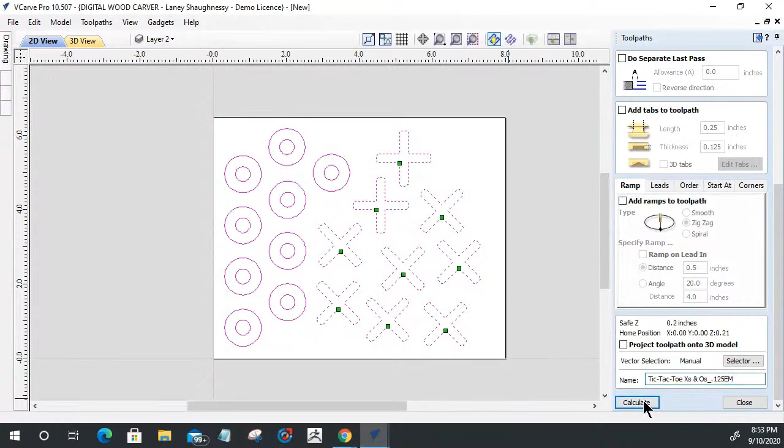And I'm going to do my tic-tac-toe, X's and O's. All right. And 0.125. Let's go ahead and calculate that. Preview that visible toolpath.

All right, there's our parts for our little tic-tac-toe game. Get rid of these little dots here. And we've just designed a little fun, very simple project. You guys saw me do it, but I'll leave the file in the description of the video.

You can carve it out of a 1x8, 12-inch long piece of material, 3/8 of an inch thick, to cut the game board out in the lid. And then a little piece of 1/8 inch material, you guys can cut out the X's and O's. And yeah, we got ourselves a cool little fun kids toy. If you want to customize them, flip it over and do some little customization. Just remember, you only got about 1/8 of an inch of material there, so don't cut through it and all that good stuff.

Let's answer Ronnie Probert's question. When will you be designing an electric guitar?

Ronnie, I tried to push that off as long as possible. No, I'm just kidding. And will you do a woodworking shop? Can you do a woodwork shop cutting it out as well? I don't know, let's set something definite, so I have to put my feet to the fire and get it done. I've been putting it off for 6 years. Might as well do it now. This will be my first guitar, kind of thing.

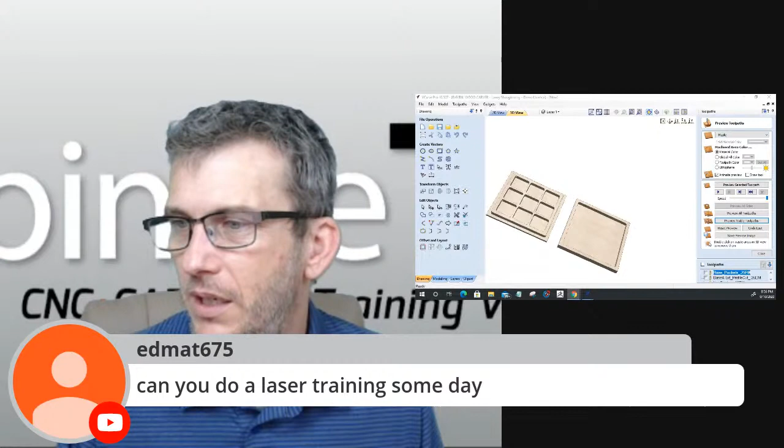Ed, can you do a laser training someday? Absolutely, I could do a laser training someday. And I did a video that wasn't a live video. Was it live, guys, when I was doing the training on tile? I think that was live, the tile class. I did a laser video last week or the week before last. So check that out on Spindle TV, how to laser engrave in ceramic tile, using the new laser module tools, Vectric 10.5 laser module tools. But yeah, we can throw in another laser video down the road coming up for sure.

All right, let's see what we got here. Place magnets on the back, right? So we could place, if we have, we would need some very small magnets. So you're talking about magnets on the back for the lid to snap closed and be magnetically closed, right?

We could put some magnets if I made this a little bit wider and I reduced some things down, or made my profile cut a little bit bigger. I could throw a magnet in there, or I might be able to throw a magnet in here and here, and then bury 2 magnets in there. So when the lid snaps shut, it snaps on those 2 magnets. I'd do them diagonally, I wouldn't put 4 magnets on, just 2 would be enough. I could probably fit a small little rare earth magnet in there for sure. We could do that, and then do a little pocket cut for the other magnets for that lid to snap shut. So that's a great choice.

You're going to make the guitar out of ash? I don't know, I'd have to go buy the wood. So I'll have to go to my hardwood dealer, see what he has available.

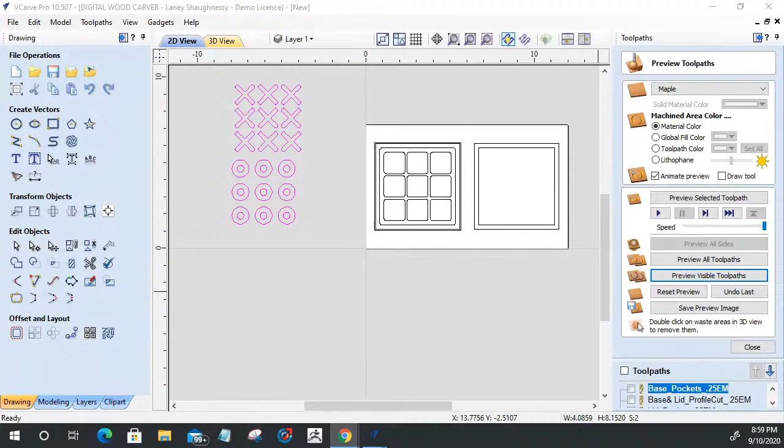Once you had your design made, you would export it out as a DXF file, and import that DXF into Lightburn or RDWorks, whichever laser software you're using. But you would not be creating a toolpath to run on the laser directly. You have to export your DXF out. So if I was exporting this, I would take it over to my RDWorks or Lightburn, and then set up the burn rates and power settings to cut those parts out on a 60-watt, 90-watt, or 40-watt laser.

But if it's the 6-watt digital laser, then you would use either your pocket profile, quick engraving, or new laser module tools, if you're cutting parts out there—but not on a 60-watt. So you wouldn't be doing it that way on a 60-watt, you'd be doing it on the 6-watt. But for the 60-watt, you would create your design, export those vectors out as a DXF, and then export that out to the laser.

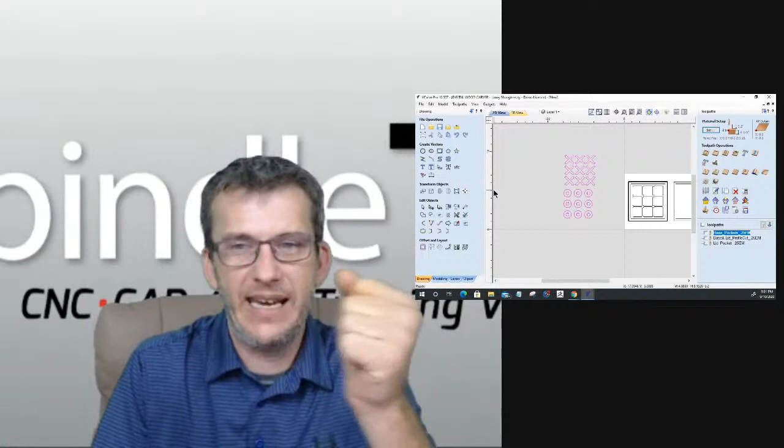Now, if any of you guys and girls have a 60 or 90-watt laser and have found a way to export a toolpath directly so the laser runs that X, Y, Z toolpath, let me know. But I've never heard of it to this point. Anything is possible, and I don't know everything, but that's how you'd do it unless someone has a post processor for a laser that exports right out. I don't know of it. All I know is: DXF, export it out, bring that into Lightburn or RDWorks, create your cut and power settings, whether it's a scan or a cut path.

Yeah, because I don't think a regular big laser can do pulse width modulation where it can do shading and all that stuff. No, it can do shading—it can do pulse width modulation because it does pictures all the time. So there may be a way, I just don't know about it.

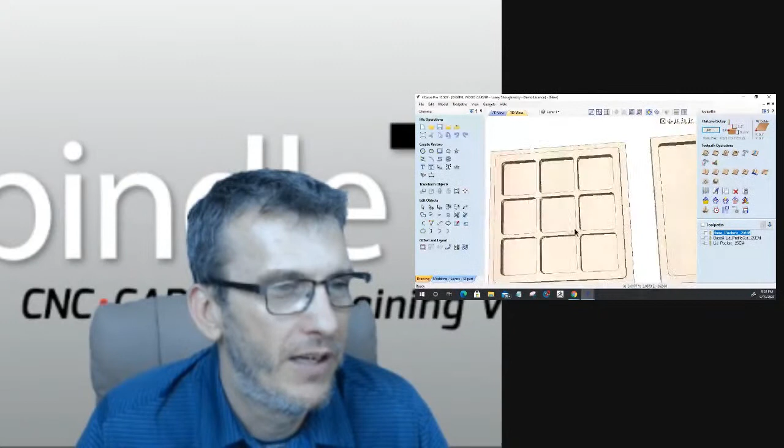All right, ladies and gentlemen, we've been at it for an hour and 48 minutes, I'm going to wrap up here. We just made a fun little kids toy, a little game box. Got to throw some magnets in there, if you want to, and find some places for some small rare earth magnets. I'd have to get on Amazon and see what size I can get, what size I'd need to make my pockets. But yeah, there you go—a fun little kids toy that can be portable, travel size, fun stuff.

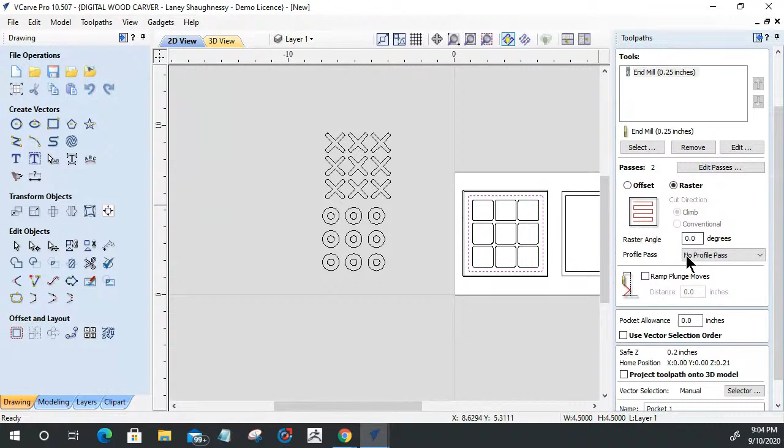Let's see here, suicidal follows up. Like it starts at the bottom, then jumps up and starts, then finishes, then comes back to a particular part. Okay, why does it move from one place to the other? So it starts at the bottom of the design, then it moves and jumps up to the top, then it comes over here. Is that what you're talking about, where it kind of jumps around?

Because I know if you're talking about it jumping around, like it does this pocket, then it'll jump over to this pocket, then that one, and it doesn't do it in a linear fashion, like this one, this one, this one, that one, that one, that one. It's based on the vector selection order. By default, it goes the shortest distance start point to start point in an XY direction.

VCarve's all over the place unless you use a particular vector selection order, and only in a profile toolpath. I know I'm not answering this question, but I might as well finish up what I'm saying here.

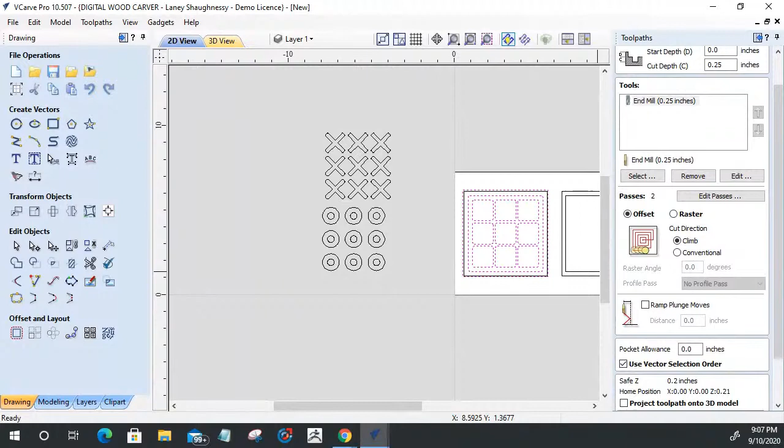Now let's go back and answer his question, because he's adding more to it. Okay, maybe it was a glitch. You're right, it has always worked normal. Okay, hold on a second. Let's go back here. Ronnie, thank you, I'm glad you have that.

Like it starts at the bottom, then it jumps up and starts, then finishes, and then comes back to the part it didn't do. Yeah, it jumps around and stuff, jumps up an inch. I know now on a 3D cut, it'll carve, and all of a sudden it'll skip a part and then carve again, and then it comes back and touches up that part that it skipped, right?

I honestly don't know why it does that. That's always a question I've had for myself. But let's look at a 3D finish cut, right?

Let's grab really quickly a piece of clip art, just for a minute. We're going to throw him right in the middle of everything. Let's move him to layer 2. Let's turn off layer 1.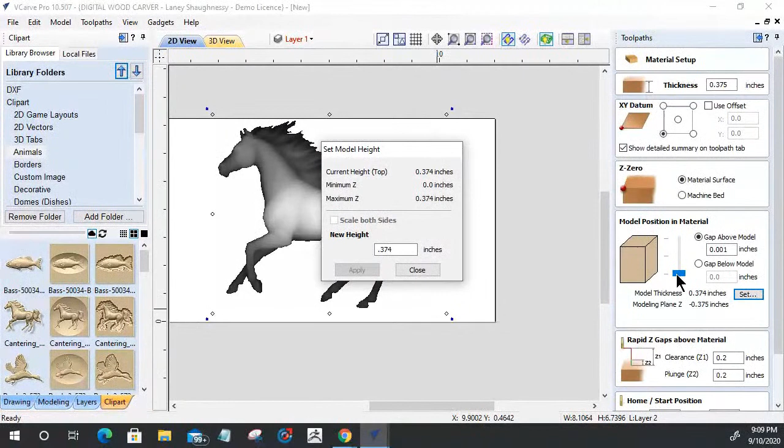So just as an example really quickly, let's do a 3D finish cut. Close the 3D finish cut. We'll use a... let's size our horse down. Okay, let's click OK. No, I don't want to change that, I'll fix it in a minute. Model is the boundary we'll do for right now.

We'll do a raster cut with the grain, 0 angle, and we'll calculate. Let that run out the clock. Oh wait, what bit did I have in there? That's fine, 1/8 inch tapered ball is fine.

Now in this, when it's cutting, we should see - if I slow down the cut preview - we should see where it skips a part, and then it'll come back and clean up that part, which is what suicidal is thinking or saying.

If we reset this preview back to a blank board, if I slow down this preview - preview the selected toolpath - let's not slow it down that much, let's kind of speed it up slightly. Wait, hold on, let's stop this for a second. Let's move this and square this up so we can see here, and let's preview that toolpath again.

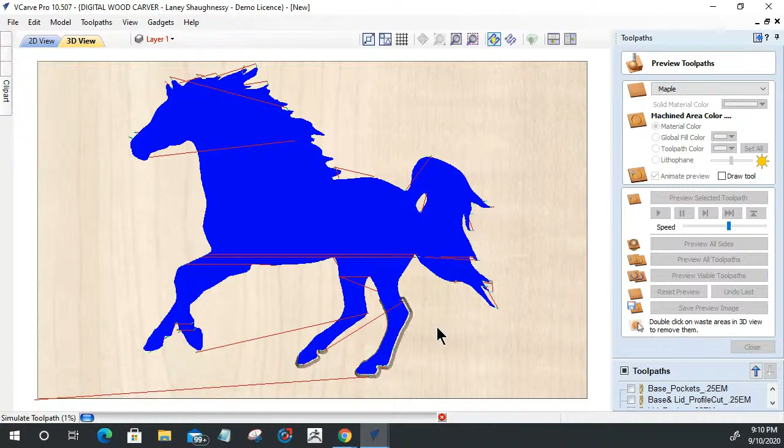So what it's doing here is it's coming up and then coming back, and it's going to bring this leg up, then come back and bring this leg, then come over and bring this leg. Get those two things together, and then it's going to bring these up to where they're about even.

Coming up here, and then it should jump over once it gets to the body. It should start working its way over a little further.

Now it's skipped all this, right? You see all this down here? See, it's already up here. Now it's coming back, and it's going to bring this leg up.

And it should join it in with the rest of the body. Nope, it's going to bring this one up. Slowly bringing those up. Now it should bring both of those up now that they're tied together, and tie that into the body.

Once it comes into the body, now mind you, the horse's tail is way down here. It hasn't done the tail yet. Let's speed this up a little bit more for just a little bit.

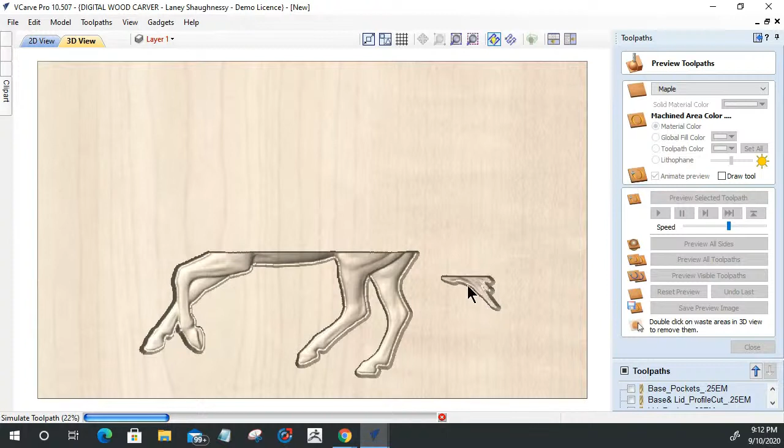Now we're getting into the tail. So now it's kind of going to bring that up and start. It's getting everything up to where it can start doing a longer linear pass, so it's kind of bringing everything up, and then it can start traveling a little bit more to speed up that time.

So now it can start traveling back and forth, but it jumps around. It starts bringing these individual parts up to where they need to be, and then it can start kind of passing. Let's speed it up just a little bit more for time's sake.

As it gets along, it's going to start getting into the neck. Here, now it's going to bring that tail up, and then it's going to bring this up to it.

Notice how it's skipping this part right here. Then it's going to come back after it does that. It's going to come back and get the bigger cuts. It's kind of doing all the deeper areas. It's going to start working this.

Now, again, it's left this part totally undone. Now, it may not clean that part up because that's not part of the model. We're using the model as the boundary, so it's not going to clean that part up. That's going to stay right there unless I pocket it out or something.

And so it's doing those linear cuts. It's kind of moving and everything, but it jumps back and forth to get everything where it needs to be so it can run a longer pass without so much of a short distance.

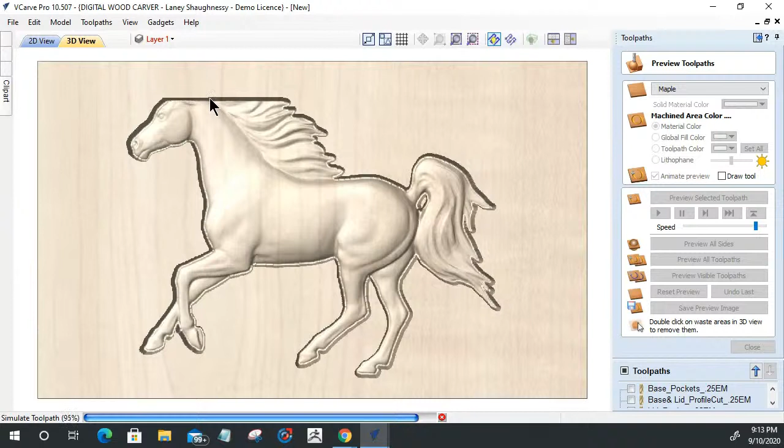And I don't know, there's a reason or a rhyme for it, it's not random. There's a reason for it. I think it's just because it's trying to get all this short stuff done so it can run that long pass to minimize that run time. And then it brings the smaller stuff up, and then it's continuing that pass, working its way, and then it can continue. So it has to skip around to bring those parts up. I don't know the science behind it, but there is a reason for it.

There's a reason for it. All right, let's go ahead and...

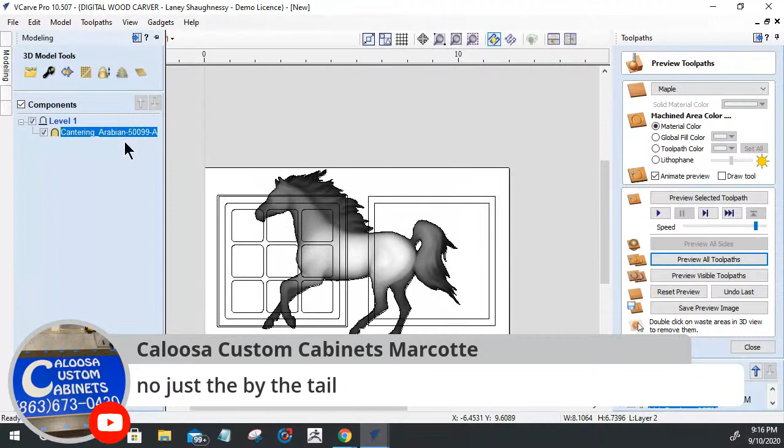Control Z, I could very easily come into my modeling tab and create a boundary around my horse. Let me undo that, get back into layer 2 here, make sure layer 2 is active. Turn that off, and let's do that again. Create that vector boundary. Now I have this vector boundary right here that I could go back and do a pocket cut on to clean that up.

So ungroup that, and I could come in here and select a vector boundary, and I could do a pocket cut to clean that up, to clear that up. So there we do that.

Having issues with splitting and rebaking 3D models, getting small pinholes. All right. Not slicing, but splitting he's talking about. That's an Aspire function. Let's close out of this.

Let me save this because I'm going to provide this file, not the horse, but let's get rid of the horse. Horse is a horse, of course, of course.

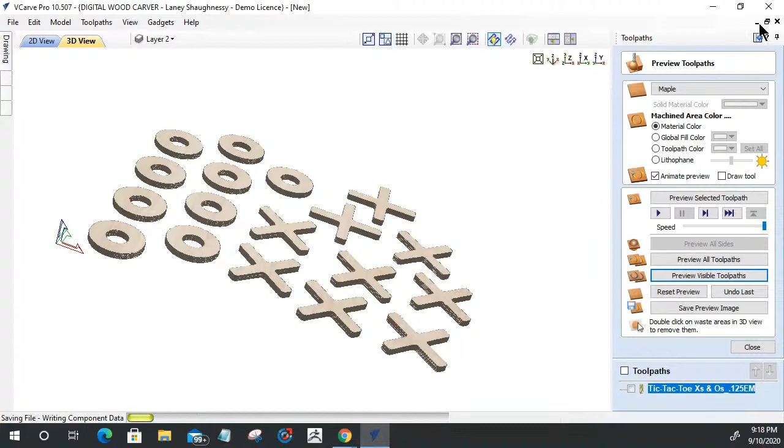All right, let's quickly get into Aspire really quick, and let's split a model and put it back together and show you what he's talking about with pinholes.

So he's saying having issues splitting and rebaking a 3D model, getting small pinholes that won't fill in with the sculpt tool. So let's create a new file here. Let's go 12 inches by 12 right now, 3/4 of an inch. I'm going to click OK.

Clip art, let's go to clip art. Grab this model right here. All right, let me size this up.

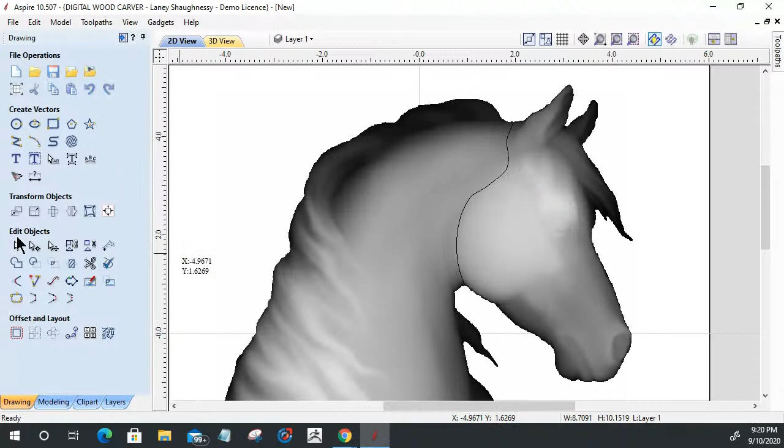All right, I'm going to take my curve tool here and I'm going to draw a curve right here. And I'm going to use that curve.

All right, I'm going to use that curve in my modeling tools here. I'm going to go to split model, so I'm going to make sure that I got my curve and my horse selected. I'm going to use my split selected component, and that's going to cut the horse's head off. Michael, close your eyes for a minute, I'm cutting the horse's head off. All right, so let's go into our 3D view.

So that has cut the horse's head from part A to part B here. And on part B, I'm going to come in and let's go out here. In part B, I'm going to rotate this part by clicking on that, and I'm going to grab this pivot point and drag it right up here to the back of the neck so that I can rotate this part down to make the horse bow its head a little bit more.

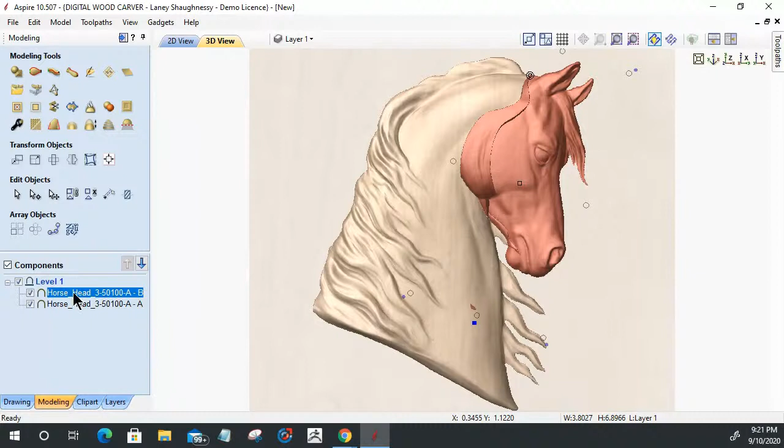Now let's come into our 3D view. Okay, now this part needs to blend properly with this part here. So let's go to our combine mode and make sure that they are a merge. Okay, and let's click here.

Now if I come in here, a lot of times I got to do some smoothing, and what he's referring to is when he's splitting the model, he is getting small pinholes. So if I take this, let me just kind of bump it out a little bit to create some pinholes. Hold down my control key and micro bump that out a little bit.

I'm just going to use this upper part as an example. Let's say that this was in the middle of my design, right? Little pinholes and everything. The problem he's experiencing is he's trying to go into the sculpting tool. First of all, I got to select both of my models.

Let me close this, cancel that out. I'll take this newly positioned head and I'm going to bake it together for a minute, bake that into one. Okay, and use my sculpting tool.

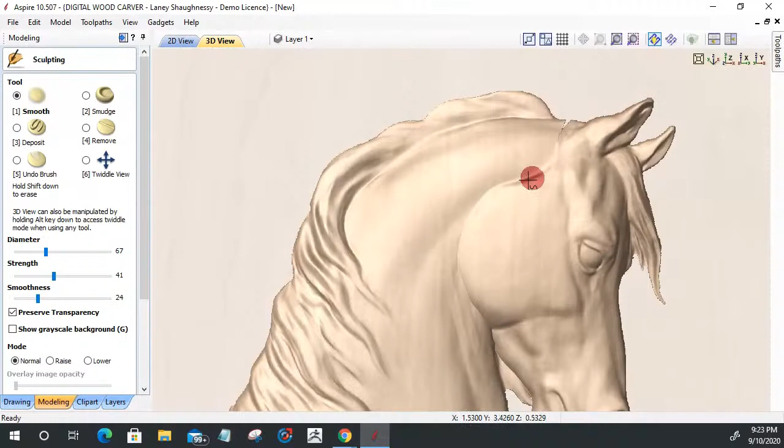And on my smooth tool here, on this seam, let me use my twiddle. Twiddle is where I want to kind of move around. Let me get this on the seam here. On my smoothing tool, I'm basically just going to come in here and start blending and smoothing this model back together. But my seam is a little off right there, so I'll remove some wood. But when I start getting into here, let me twiddle up to where our little imaginary pinhole is.

Let me twiddle, zoom back in. In this area where that gap I created is, if I try the smooth tool, that's not the right tool at all for this, because the smooth tool is just going to start spreading the gap. We don't want that, so I want to undo that.

If I start trying to fill in material, to deposit material to try and close that gap, it's not really filling in. If I tilt this to the side, that gap didn't fill in. Let's turn him around. All I've done is created a big shark fin on his neck. That add material deposit is just building up material, but it's not closing that gap. It didn't close the gap, those pinholes and stuff.

So the only way around that is, first let me close this and discard all these changes. And let me come back and undo the bake the component.

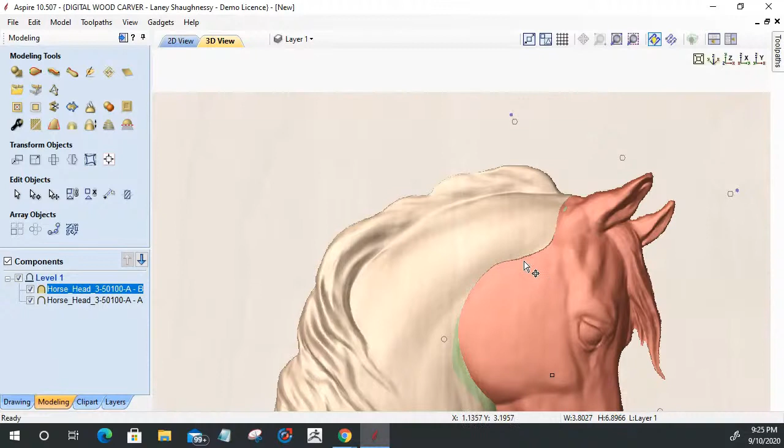What you have to do is, before you bake, you've got to overlap. Your component has to overlap completely the next component. It's got to blend into that next component where there's no air gaps or voids. So you've got to either change your split seam or whatever, if you can't overlap without totally distorting what the design should look like. You've got to overlap so there are no pinholes, because once it's baked, they're baked in there, and you cannot add material within that gap.

Now, in my case, on my overlap, I can select both of these guys. I can bake them together. Go into my sculpting tool. Let me twiddle my view - twiddle means move around - so I just want to be able to focus in on this area here.

The first thing I'm going to do is a little bit of smudging. So I'm going to kind of pull this. Oops, that was the wrong smudge direction, let me undo that. Undo brush is a wonderful thing. I want to do a bit of smudging. Not much - nope, maybe the smudging I don't want to do. Let me undo that, let me do some smoothing instead.

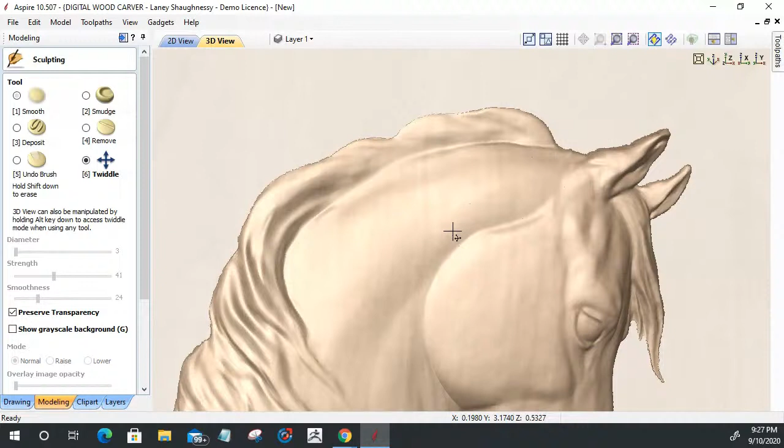Okay, all I need to do is just kind of smooth. Let me twiddle that view. And then smooth it out. And then twiddle, let's get this back into full view.

I can clean the rest of that up with profile cut and sanding. But you have to overlap - that's the only thing you can do, Rodney. You've got to get more of an overlap before you bake, because once those pinholes are baked in, you can't fill them up.

Now, depending on where the contour is or where those pinholes are, I could create a vector around the area where the pinholes are, and create a shape, a flat shape that fills those holes in. But then I've got to make sure I don't build it up too much. I could draw, for instance, let's say I had a pinhole here - that's too big to be a pinhole, but that's okay.

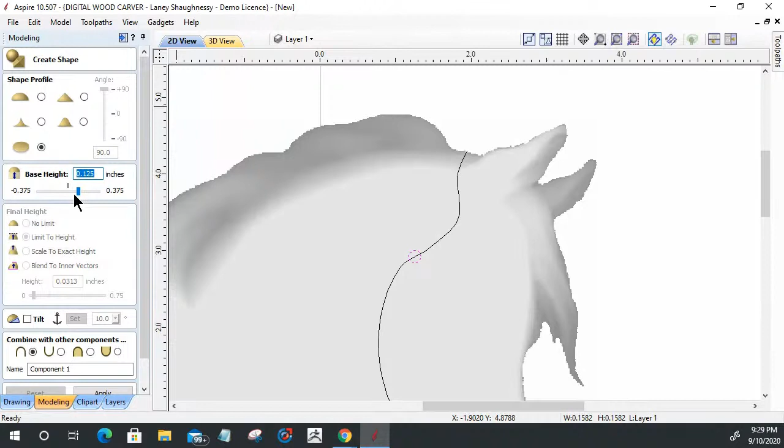You guys get it, let's turn this component off. If I build this shape up, whatever height it is, let's go into the 3D view. And of course, let's bring that down a bit.

I could fill that material in, and then once I've got everything baked together, I could take those, fill in those pinholes with my Create Shape tool. I could bake that together, and then I could sculpt again. I could come in and just start smoothing that away - that kind of deal, right?